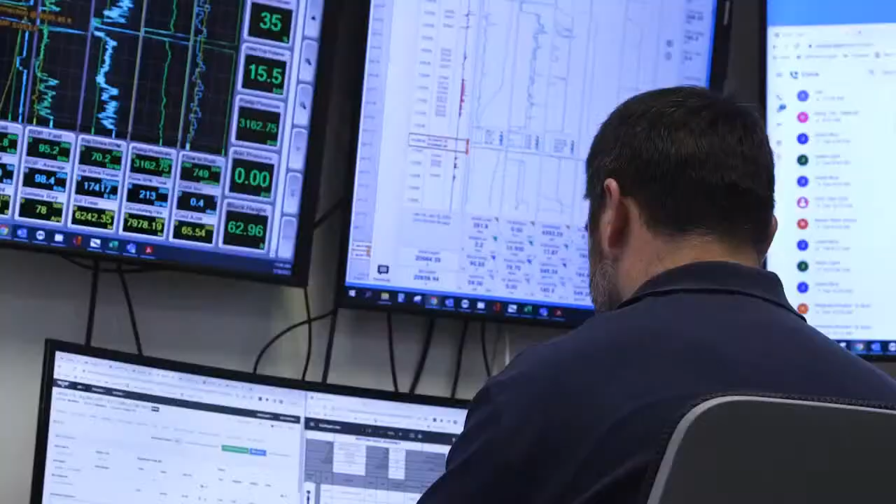Just check and see. All right. Somebody said in the comment section there about bad sound quality. I completely didn't realize that my microphone was pinned to my back. It was on my little cord wrapped around my back. So you guys can't see that. I've got these little fancy things. So thank you, I appreciate that. Right? Like, some people might be like, oh, well, I don't want to be the rude person. No, you're being very helpful. If we do not get feedback in this industry, then we don't get better. So there I am, looking like an amateur. Thank you guys all for pushing in.

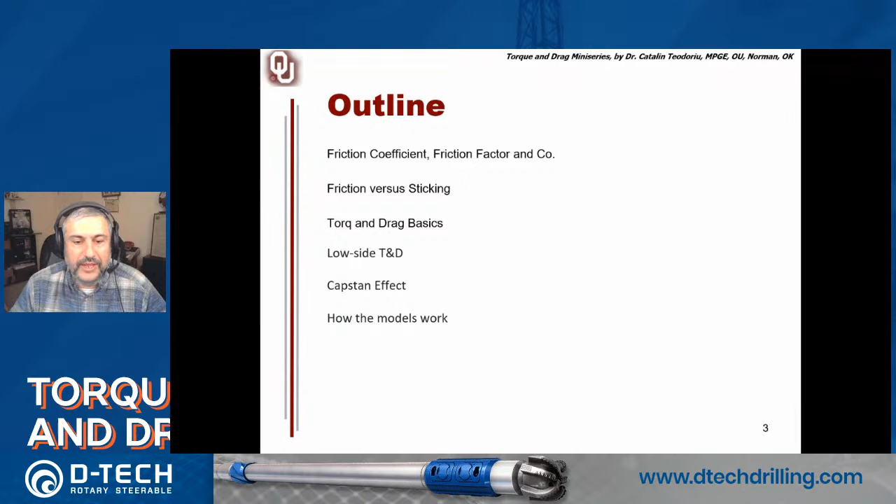So let's look at friction. Friction is typically the frictional force resisting the motion of two surfaces in contact relative to the normal force pressing the two surfaces together. Of course, I took this from one of the famous dictionaries online. But what is very important on friction is that we have friction when we try to move. As long as there is no tendency to move between the two surfaces, friction doesn't exist. That's a very important definition.

Everybody really agrees with it, but I wanted to make sure that it is written on my slides accordingly. So friction is a dynamic process, and normally everything under friction will be defined as a coefficient of friction, which is a coefficient that tries to make a relationship between the frictional forces and the forces that are necessary to move that object.

With this in mind, if we look at friction factor, you will find a lot of papers confusing friction factor with coefficient of friction. And I cannot stop, as academia, trying to explain to you that friction factor in most of engineering is normally defined as the coefficient of friction of an actual value divided by the coefficient of friction of a known value.

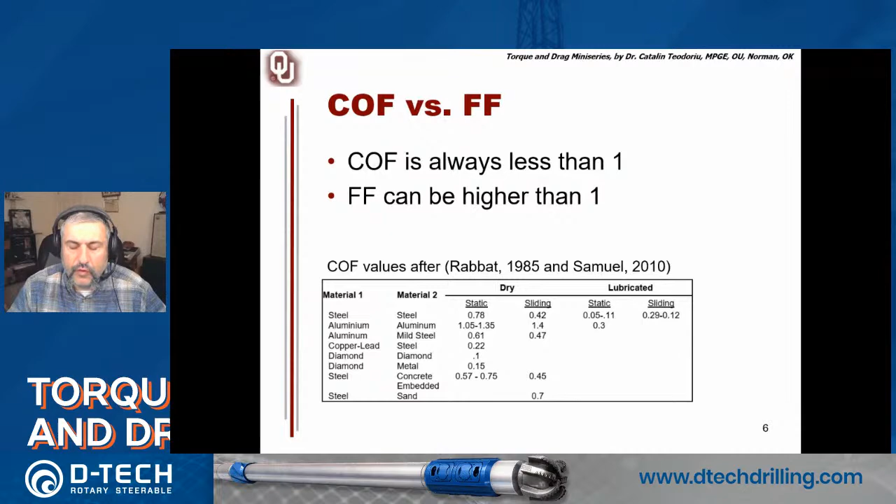But at this point, let's look at the friction laws. We discussed these friction laws in the past two presentations. Obviously, I cannot skip them in my presentation, and I'm pretty sure you're going to see them in the next 10 presentations that will happen here. But the idea here is that we all agree that friction force is directly proportional to the applied load. The applied load normally we define as a normal force, which is the force that acts normal or perpendicular to the surfaces in contact.

The second one says the friction does not depend on the contact area. But here it is very important to talk about what scientifically is the apparent area. Apparent area is not the real area that the two bodies may have. The real area is actually the area that really comes in contact between these two bodies, and I will talk about that too.

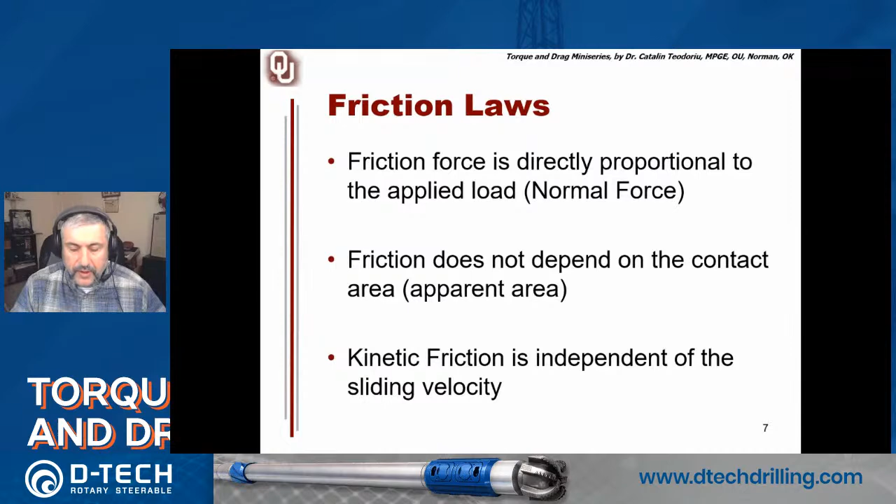And last but not least, the kinetic friction is typically considered to be independent of the sliding velocity. This is something a lot of people are arguing about, and mainly the theory of kinetic friction being independent of sliding velocity comes from dry friction. That means there is nothing in between the two objects. But in reality, we always have something there. So with these three laws in mind, let's go a little bit to the real world.

This has a very important impact on the torque and drag calculations. Why? Because in torque and drag calculation, if you are able to estimate the contact points of your drill string with the wellbore, and you are able to calculate the normal forces at every point, that will show you a big difference compared to a very simplified system. We have talked a little bit about soft and stiff string models, and the main difference will be the ability to identify these normal forces, their magnitude, and because all forces are vectors, also their directions.

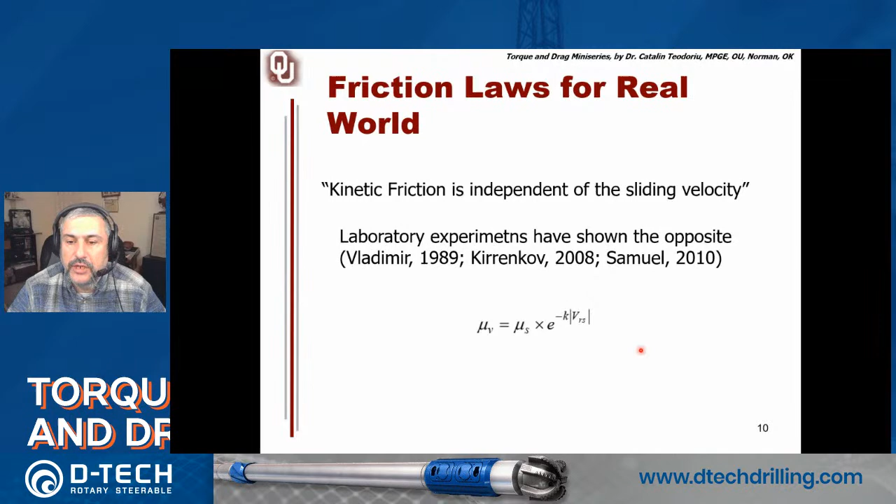And that's very important. I remember there was a very nice paper where adding microspheres of granite or marble into the drilling mud showed a massive reduction of friction in some wells. Pretty interesting work on that. So the world of friction, it's complicated.

So we do have dry friction, and dry friction, in my opinion, does not happen in your well unless you drill with no mud. But even if you drill with no mud, you'll still have some humidity there. You have cuttings, you have a lot of other stuff. So dry friction is more laboratory. So you come to my lab, I will show you how dry friction works. It doesn't work in reality. In reality, we always have wet or lubricated.

The reason I call it wet is that if you have water, a lot of people believe that water is not a lubricant. Believe me, depending on the conditions, water is a great lubricant. And you may ask, where is water the best lubricant? Well, if you have rubber and steel, water will be the best lubricant you will ever have for the system.

Then we talk about static friction, and as I told you already, static friction happens at the beginning of the motion before your object starts to move. And then the dynamic, and you see here in the brackets, kinetic or sliding. Our industry is always fantastic at changing the names. So kinetic sliding friction happens when the two objects are already in relative motion to each other and they are moving.

Last but not least, not necessarily strongly accepted in our industry. However, if you look at the companies building downhole components, particularly downhole motors, bearings, and everything that rotates within each other, we do have hydrodynamic friction. In hydrodynamic friction, between the two surfaces, you always have a fluid. It can be your drilling mud. It can be some other liquid form of lubricant that you are putting in between.

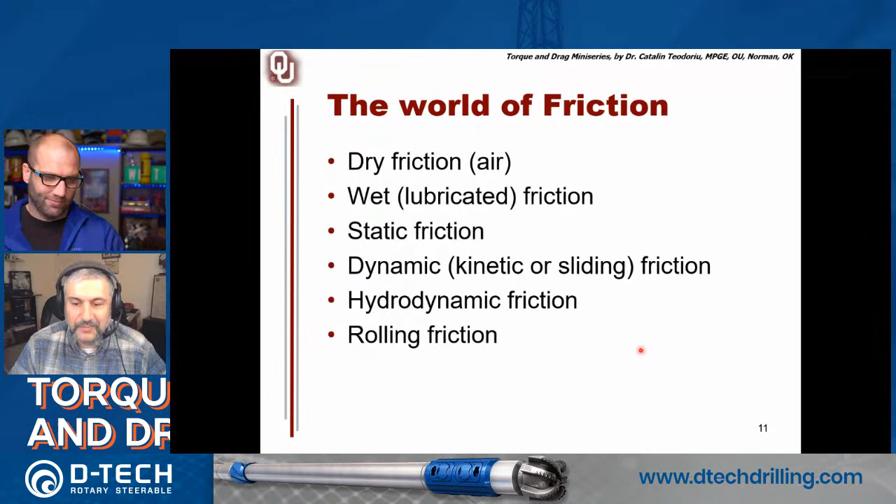So let's look now much more intimately at our friction. First of all, if there is no motion, friction force is 0. There is nothing that you're going to see here. We are in a kind of lockdown, and the lockdown is not the lockdown from 2020, but another lockdown where, if you look at this surface, you're going to find out that every surface we have has a certain roughness. The higher the quality and shine of the surface, the smaller the roughness, but that roughness exists. It's just a matter of how much you magnify it.

Typically, if the weight or the force pushing down is very big, some of these surfaces will highly flatten. They will deform. We suffer local stress deformations that will be induced here. So let's move now to the point where I'm trying to move my system. And in order to be able to move my object, I have first to overcome these points of contact that happen at the micro level between the two surfaces.

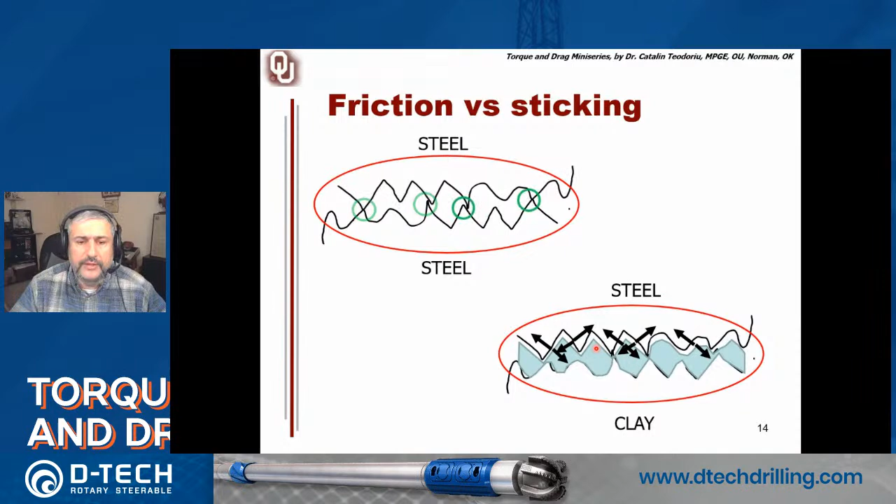In the case of the other materials that we have, sticking can be aggressive. Clays are pretty much one of them, but we also have some medium type of sticking here. The next one I like to call shear. Imagine that you have an object like the one shown in the lower part, the one that is now moving back and forth, and you are trying to overcome this, let's call it a macro tortuosity you have in the well.

Whenever you try to move that one, because the object is much more rigid than you expect, that object will now try to shear to correct the wellbore. And this is not friction anymore. This is actually mechanical work that you spend in the well in order to destroy the rock, to break the rock, and allow the object to move.

Why I'm talking about this is that a lot of the time, we are trying to adjust the friction coefficients in the hole by performing a mini back and forth movement of the string or rotating the string and so on, in order to understand how the friction works in the well. And then whatever you see in the top drive values, you try to put that in your model, and that's the way you do calibration of your friction factors.

But do not forget that in a real well, you don't have only the friction you see on top, the friction that actually allows you to find out what the coefficient of friction is. In the real world, you are also shearing, you are crushing the wellbore, because the wellbore quality is not perfect. And tortuosity and micro-tortuosity in the well and their effects have been discussed a little bit.

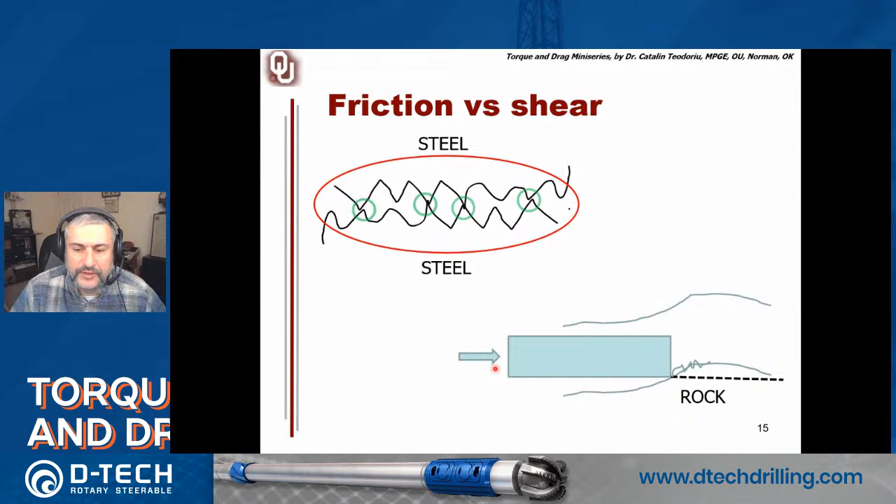These are most of the models that we all agree on, implemented in a lot of software today - they will have their own adjustment of the Coulomb friction model inside. Keep in mind that this typically happens symmetric. A lot of people consider it to be symmetric, meaning that if you move to the right or to the left, the system will just be a vector, but symmetric in shape.

I found out that depending on the surfaces, especially if two surfaces have already been moved in one direction, when you suddenly change the direction, the friction may be slightly different, at least for a while. So that's kind of very important here.

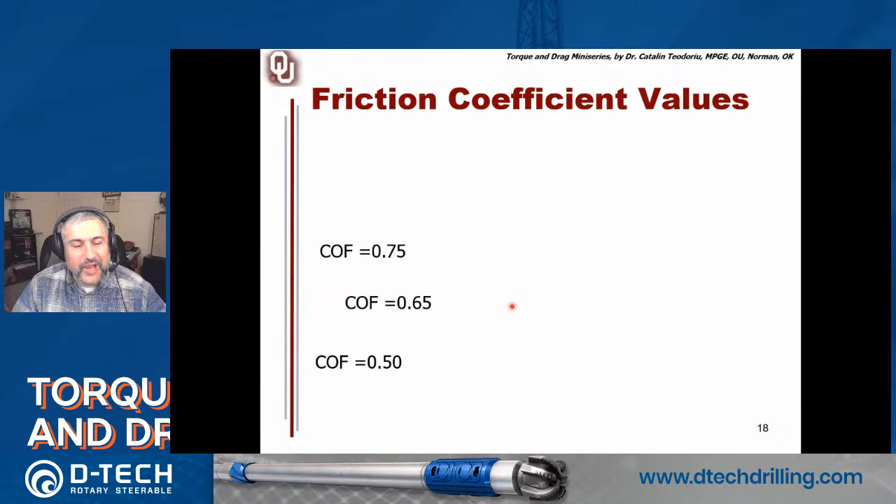Okay, so now we are getting closer to some ranges. These are some values I got from the drilling manual, where they say in an open hole you expect somewhere between 0.15 to 0.3. If you switch to oil-based mud, 0.15 to 0.25. I don't really agree with that - I've been testing oil-based muds in the past, and I found much lower values for oil-based mud in the system. What I can agree is that most laboratory tests have shown much lower values than field tests.

The reason, if we go back several slides in my presentation, you will notice that downhole you do have sticking and shear, which will alter your overall values. But also, these are some other values I have found. This is Gaynor et al. 2001, friction factors, a coefficient of friction, taken from over 100 wells. You can see most of the values are literally below 0.3 on average, so we have really low values there.

This, in my opinion, is where we have to look, because if you test a steel against the rock in a laboratory environment, you will get values which are actually typically lower than 0.25 in most cases. There are very few cases where you get a higher friction coefficient in any laboratory for that.

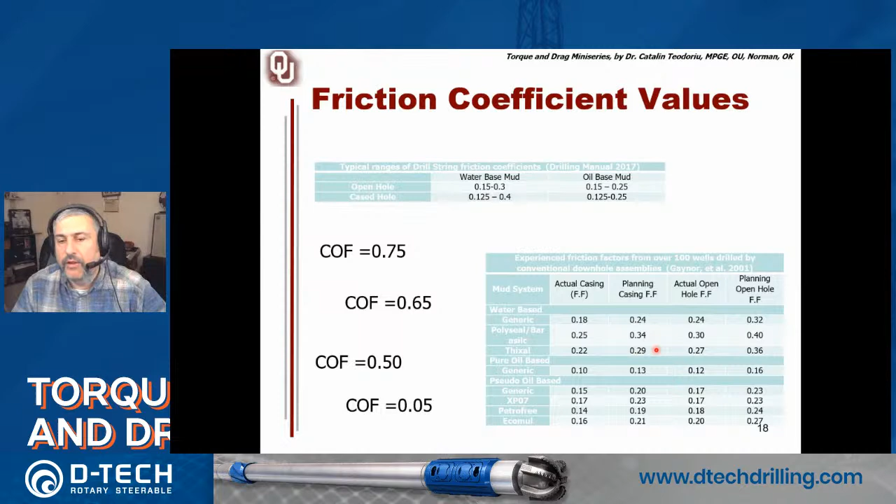This is something very interesting, because if we really want to dissect the friction factor, we want to find out why the friction factor creates so much trouble. So I had to spend 19 slides, actually more than 19, to talk about friction factor in torque and drag. The reason is because friction factor depends on almost everything you have downhole: wellbore stability, fluid properties, deflection technology, formation type, hole cleaning, and of course the properties of the materials in contact. A lot of things will create trouble downhole.

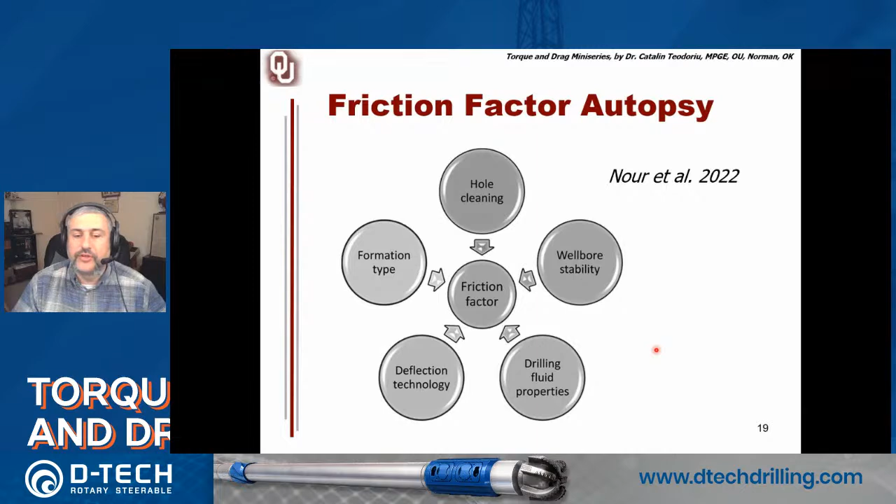But it's important to learn about that and to solve the problem. For example, hole cleaning: we know that the more cuttings you have in the wellbore, the more friction you have, so just do something about the cuttings. We know that drilling fluid properties, like adding additives, will enhance the properties related to friction, so let's do some enhancement on all these properties.

So at this point, let's go to calculating torque and drag. The classical theory of torque and drag, these are the slides I received from Mr. Juvkam-Wold when I started teaching my first class at Texas A&M. He was so kind, he said okay, this is what you have to teach, and you teach it. For your information, I started teaching at Texas A&M somewhere in the middle of the semester, co-teaching the course with Dr. Juvkam-Wold, and he was so happy to dump on me all the torque and drag.

So at that point, if we look here, this is a piece of our drill string. We chop it, put it downhole, and work on that. On this piece of drill string, we have our tension in the drill string pulling down, normal, generated by the weight of the object acting along the wellbore. Then on the other side, we have the tension plus the incremental increase of that tension on the wellbore. Important here, we look at the inclination, one of the main important factors that is inevitably critical to address torque and drag in wellbores.

So the equations are pretty simple. We assume that the acceleration is 0, so that means we can do a very simple force equation on that. So the sum of forces along the wellbore is 0, and the sum of forces perpendicular to the wellbore is 0. That allows us to define the increase of tension, which will be proportional with the weight and cosine of inclination, and the normal force will be the weight sine of the inclination.

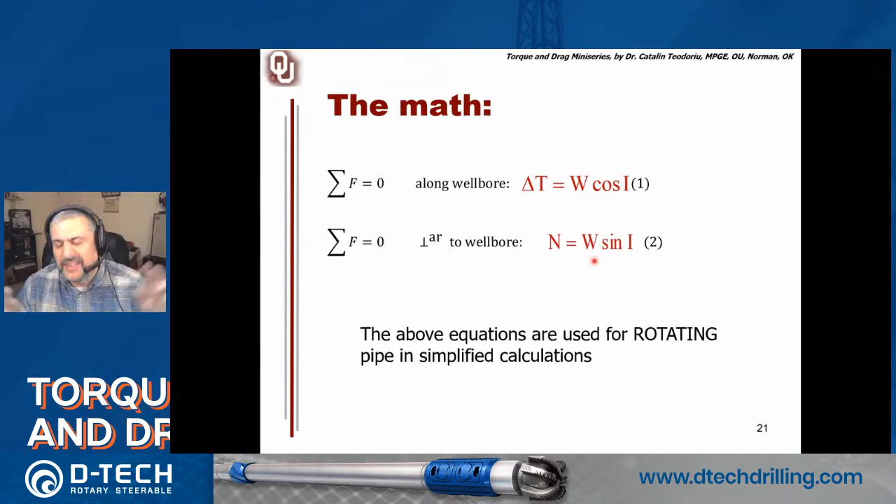Typically, we consider this equation as being valid for when you rotate the pipe, because rotating pipe means that you are in a dynamic low value of friction coefficient. So friction in this case, as an assumption, is no friction at all in the system.

Now, when friction happens, we really need to move the string. So the string has to move, in this case lowering the pipe. The friction force will have to oppose the motion, because friction force is the opposition in our torque and drag system. So friction always opposes the motion. And when we raise the pipe, you're going to notice the friction will go in the opposite direction.

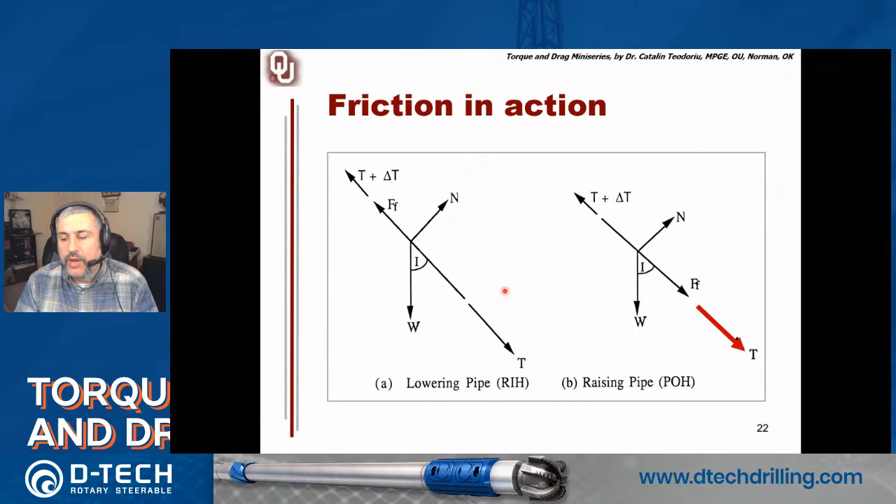So once we learn that friction exists, now we can write the same type of frictional forces for that. You can notice here that the change of tension will become the weight cosine inclination plus or minus friction force. Friction force now has to be treated as a vector. So if the friction opposes the motion, depending on the direction you go, the friction force will be adding to the tension or will decrease the tension.

This is very important, because whenever we do a calibration in the field, the friction coefficient calibration, we do this in both directions - lowering the string and raising the string. We look at both directions, and that gives us a much more accurate way to measure the friction coefficient for our system. As you can notice, typically the friction coefficient in the wellbore has to be between 0.15 and 0.4. I got the same from Juvkam-Wold a long time ago. He's pretty legacy on that, so he knows what he's doing.

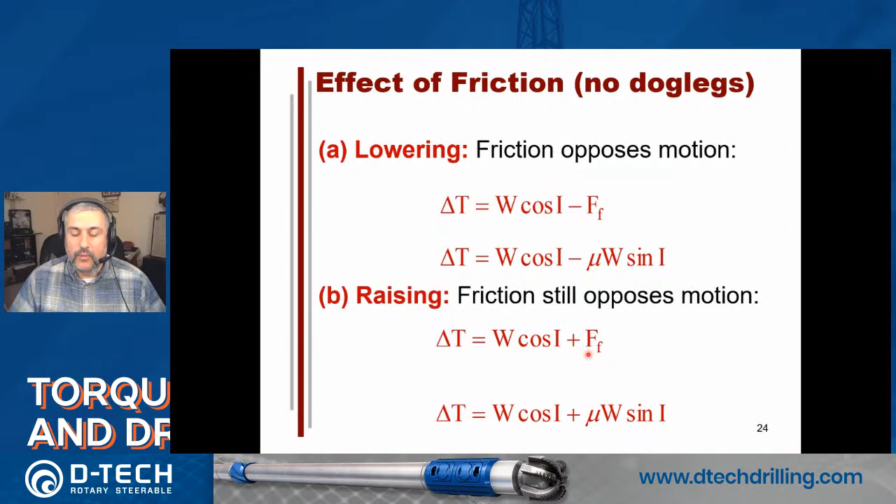So now, again, I try to write the same equation once again. For the lowering, we have to keep it negative. So when we lower the string at the surface, it will look like the hook load will decrease, because the friction force is kind of opposing the weight of the system. When we raise the string, when we trip out, the friction force will be very bad for the whole process, because the friction force will add weight to our system and will increase it.

Here is a very classical example that I believe almost every petroleum engineer in this world has had in his classes. It's about what is the maximum hole angle or inclination angle that can be logged without the aid of drill pipe, coil tubing, or other tubulars - in other words, a free fall of the tool. Assuming that you forgot to set your slips correctly and your drill string free falls in the wellbore, the question is, what is the wellbore inclination where your tool will stop? I know this happens a lot in our industry. So let's look at that one.

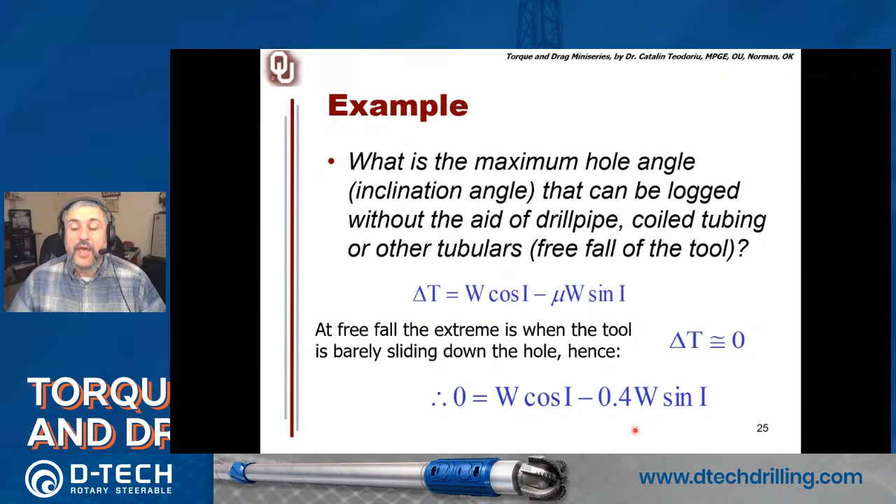So in this case, we assume that the increase of tension in our logging tool, which means the wireline, is 0. For that, we know that the weight or the force that is moving the tool downwards is supposed to be equal to the friction force. You can see here I put a value of 0.4 for the friction coefficient, and from here we can easily calculate the inclination of the wellbore.

In other words, if you are dropping things in the wellbore, the higher the friction coefficient, the better. Obviously that will not be good for drilling and for torque and drag, but at least if you don't keep your wellbore clean and you keep dropping tools in the wellbore, make sure that they will stay better for you. So with this kind of inclination, this will apply to the bottom hole assembly. That means that in a horizontal well, the bottom hole assembly will never push on your bit, and we know that.

So that's why in order to create some weight on bit on a horizontal well, we need to push the whole string downhole. Something that in a classical vertical well theory from the 1950s, you'll be told don't do that because you are buckling the string. So let's go to the next one.

Basics of equations for horizontal wells. Horizontal well, if we assume that we have just a simple pipe, the pipe sits on the wellbore. That's the classical soft string model. We have the weight on the pipe. The normal force is equal to the weight of the pipe. So we can easily write that the force to move the pipe is friction multiplied with the weight. I put here some numbers just for getting some ideas on that.

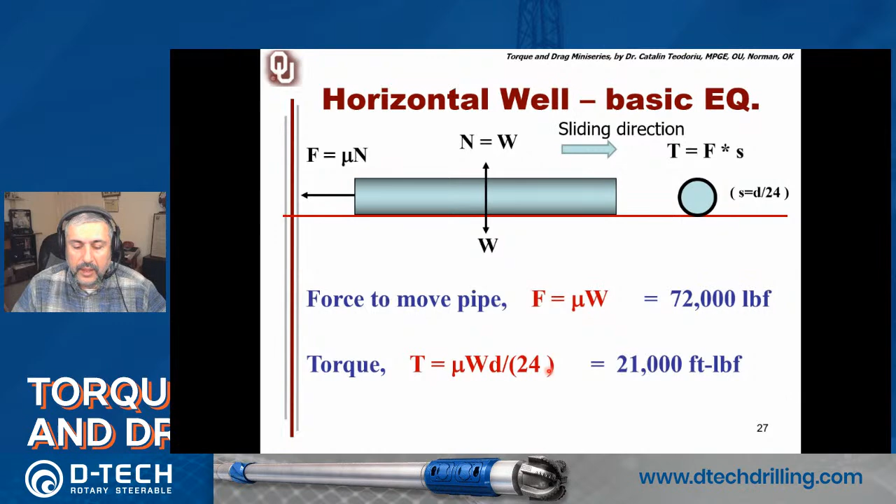And the torque will be now classical mu, so friction coefficient multiplied with the weight, which will be the normal force, multiplied now by the diameter, and I divide it by 24 because typically we are using foot-pounds for the units, and it is a unit conversion. But what is actually important in here, I will show you in the next slide, is that whenever you rotate the pipe, because of the friction we have in the wellbore, the drill pipe or drill collar or whatever rotates in the well will tend to climb on the wall.

So instead of having a contact here at the bottom, we're going to have a climbing on the wall for the system. And because of that, normally and accurately, we need to correct this with the cosinus of phi, which will be shown in here. And this cosinus of phi needs this correction according to the system. Some authors, for example, have also included now the fact that we are in motion. So we have omega divided by the velocity, slip velocity for the system. So you create another equation here.

Samuel in 2010 actually introduced a much more complex equation where actually here we are talking about the dog leg, we are talking about the sinus theta as an average, and that will be like a 3D model for this complexity. So this angle becomes even more complex for our system.

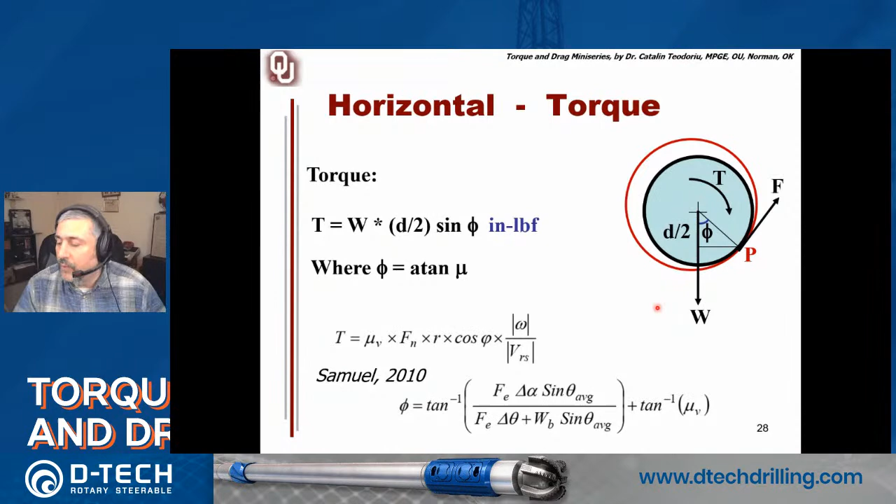So with all of this in mind, it means that if you look at simulation on model A versus model B, model C, and so on, you will find out that the accuracy of these models actually depends very much on the equation they are using and how these equations are actually interpreting, for example, torque. Torque is very important on that because torque will generate a lot of further calculation in the well.

Next but not least, we have to talk about the Capstan effect, or if you want, the effect of tension in the drill pipes in combination with the fact that the wellbore is curved. And in this case, notice here, we have the net side load that will act on that one. So the tension in the pipe will inevitably change the normal force. If you remember, normal force is not only the weight of that object, but is also the sum of any other forces that will act on the object.

So in this case, for the model on the right, the force on the pipe will increase the normal force by creating now a normal force which will be equal to 2 times the tension in the object. As you can see here, I'm totally neglecting the weight of the pipe for this case. So new models will start now to add to the torque and drag these side load effects. So you need to have a model which is capable to identify the contact points, and you need models that are able to calculate the forces in these contact points in order to generate this.

So in other words, now that I know that the tension in the system has an implication to the magnitude of my normal force, I have to include this. And the standard theory, the very basic theory, will be discussing the effect of dog legs to this theory. And these are the very simple equations, the basic equations, where in this case, as you can notice here, we have to use the tension, the T, plus delta T as an increase or a change of the normal force on that one.

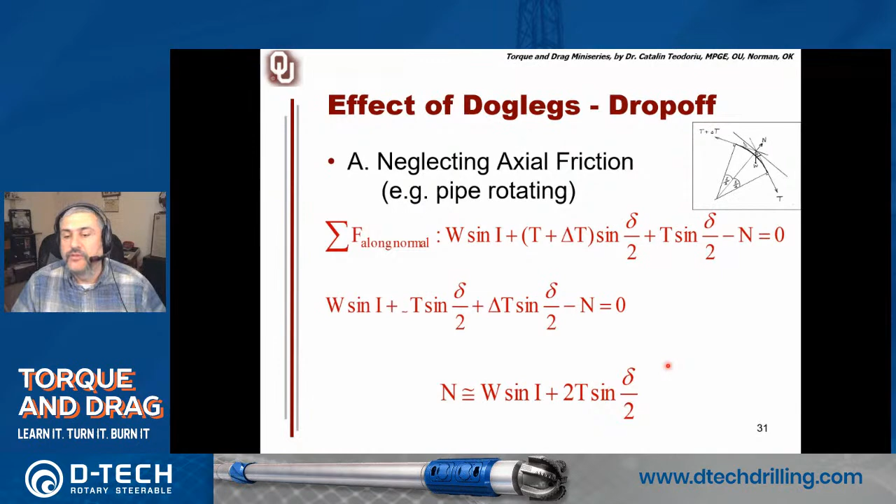The complexity of the model is even higher, but obviously I cannot disclose to you all the secrets of the simulators on the market because I may not survive too long at this point.

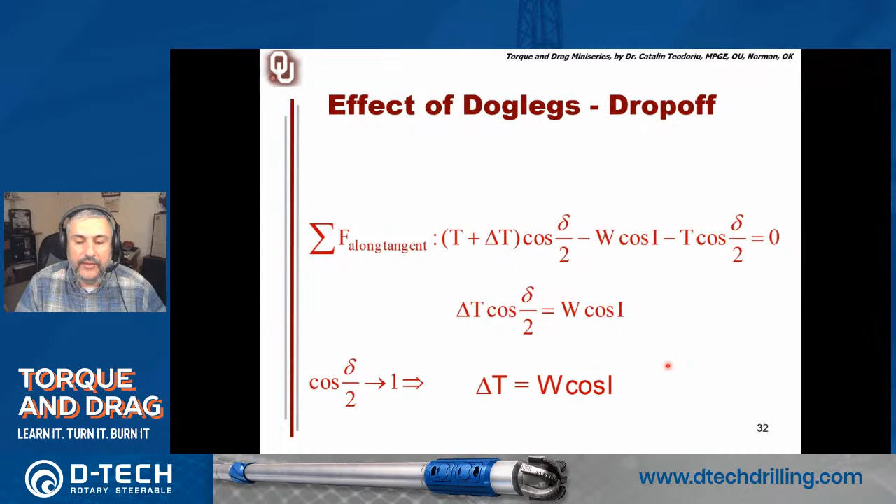So with all these calculations now, the key factor for creating an accurate model is to divide your entire drill string in shorter pieces, and to calculate for these shorter pieces your contact points, so that in the end you are coming up with a normal force, which is a combination of the weight of the system plus the tension in the system.

So now once we add the friction, you will notice here that the friction in the system will alter the incremental increase of the tension in the system. So when you start from the bottom to the top, you're going to add this incremental friction to the tension, and as a result, you will have a much more accurate model for your torque and drag. Do not forget, we have the sign here, minus, and there will be another one with plus, depending on whether you are raising the pipe or lowering the pipe.

Actually, some authors right now are even including a vectorial tendency for torque calculation, where they are considering the fact that your pipe is moving, so that's vector 1, and the pipe is rotating, so you have a second vector, and by combining these two vectors, you are working on this combination of the systems. So that will be the 2D model, and as I said, the 3D model takes into account the whole real part of the well.

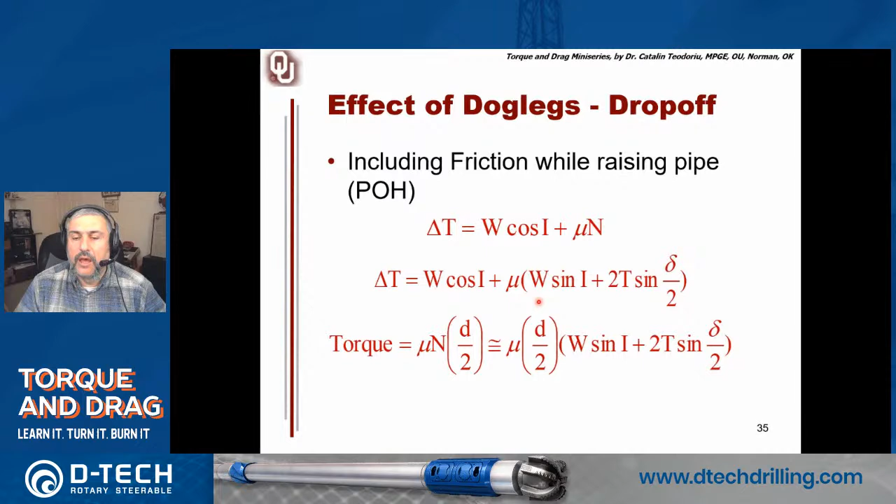In order to have that, you need first of all an accurate wellbore path description. You need real-time measurements sometimes, and accurate measurements. Actually, I found a paper recently saying that particularly in horizontal wells, most of the wells are really off from the predicted path. And there is a big debate right now on the market about the accuracy of drilling horizontal wells, particularly the survey accuracy.

Some other analytical equations look like that. As I said, we could talk for the next 3 weeks if you want me to go through every single system, but this is another model, a little bit more complex, and there are tons of them out there.

But the idea here is that whenever you do this type of calculation, you are using different numbers in order to get adjustments that look like what you see in reality, and these adjustments require you to play with a lot of factors. So academically speaking, what we do in our research group is create a pool of these friction coefficients, and then let the system crunch a lot of these models with more statistical approaches, trying to find a better link between these friction coefficients.

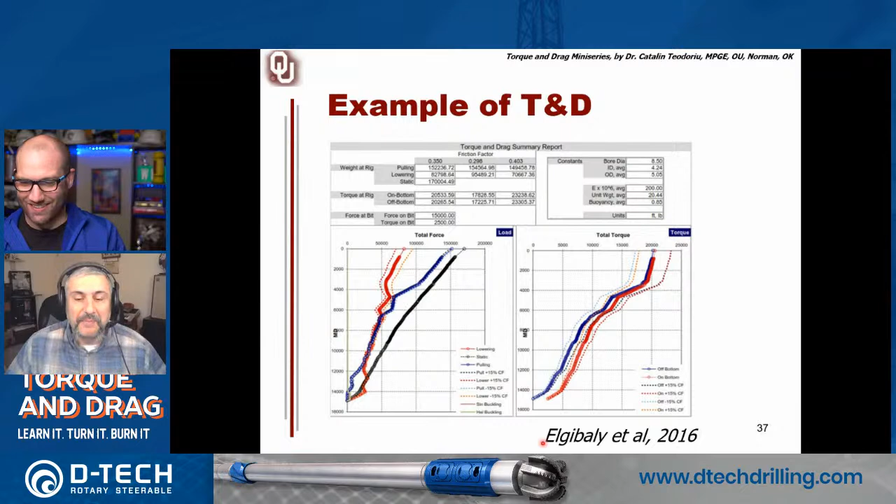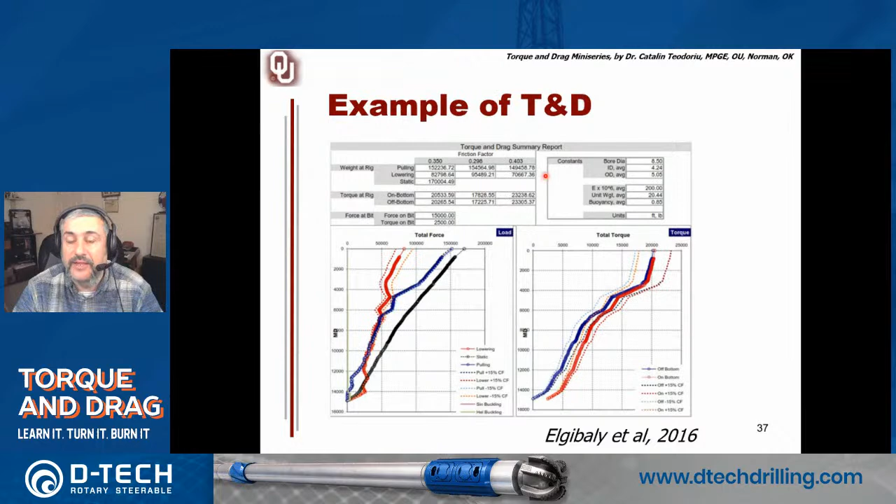So I was saying that typically the wellbore should be divided in sections where you can easily define friction in that section, and you should actually have a variable coefficient of friction along the wellbore. That's actually the most accurate approach you can have. How you get these coefficients of friction and how you apply them, I believe you're going to see from several of the next speakers, who will come with different models.

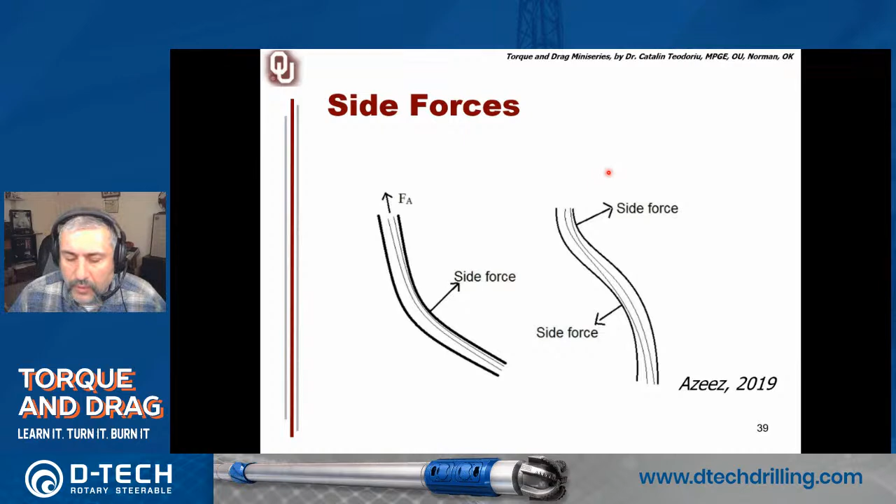The second one, I don't have a picture here, and I didn't know whether I should talk too much in my presentation about that, but the second one is buckling. Buckling will create side forces independent of where the well is. If it's horizontal or vertical, in both locations, you're going to have side forces because of the buckling.

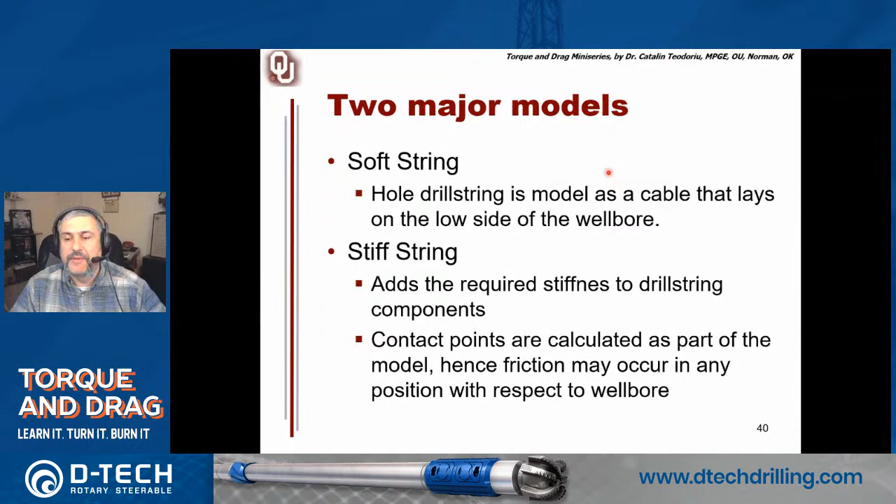So the two major models that you'll find as part of the softwares on the market are the soft string, where typically the whole drill string is modeled as a cable. So therefore, the cable will always lay on the wellbore. And then we have the stiff string. The stiff string typically is the one where you add stiffness to the drill string. Particularly, you have different stiffness for the bottom hole assembly versus your drill pipes, and you create now contact points which are not uniform as the soft string. Now you can play with that.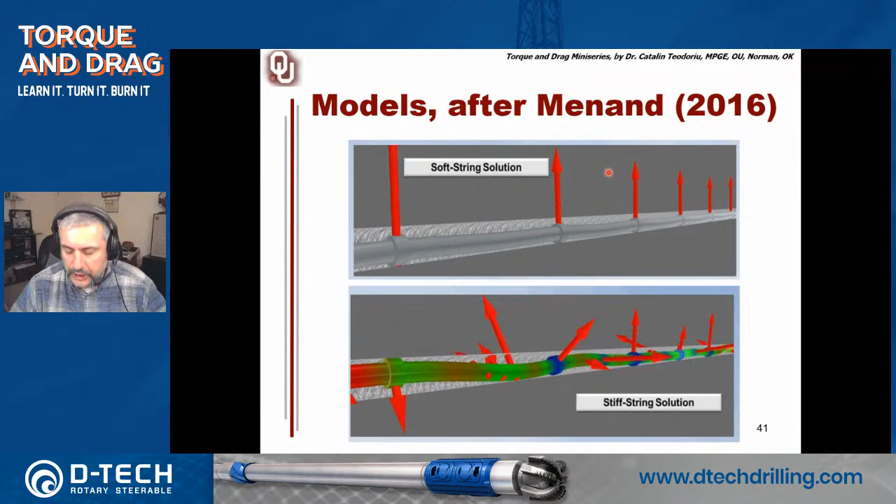Once again, it is because, number one, you are trying to use one value for the entire system, which in my opinion is wrong. And I think that probably the next generation of torque and drag simulations will try to come with a much more complex coefficient of friction distribution in the wellbore. I would call it local coefficients of friction. They could really improve that.

And then, second, don't forget, we have sticking, we have shear in the wellbore, elements that are not necessarily described by the standard equation of torque, where you say the torque is a function of friction coefficient multiplied with the normal force and a sort of arm-like diameter of the pipe and so on. So that's one of the things that I've seen. Friction adjustments are one of the most important parts of our life, and particularly when you work in the field, you need to pay more attention to this.

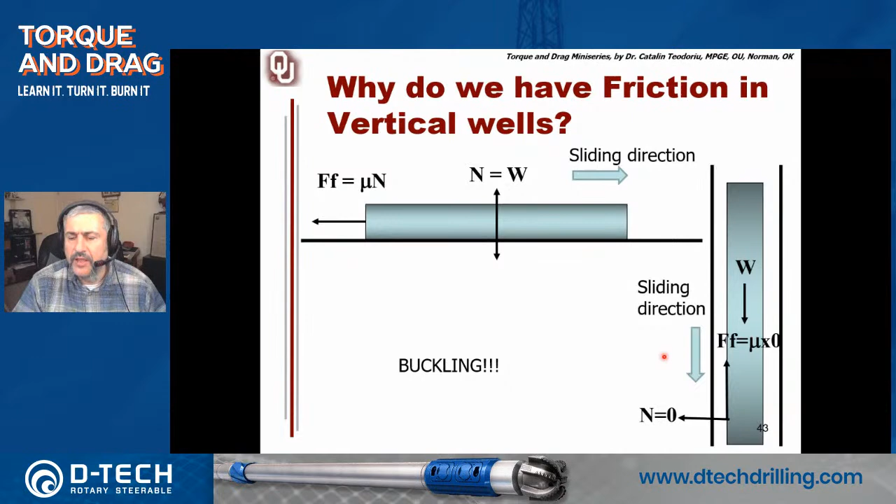well bore. And you can see here from Stéphane's DrillScan simulation, again, the buckling of the string and all these side forces, contact forces in the vertical well, which add this friction in a vertical well. So very important, friction may exist all the time, even if you may not necessarily see at the beginning where the normal force is coming from, because normal force is not only generated by the weight of the string, but also by the other side forces that may take place in the system.

And let's go to the next one. Let's burn it a little bit. What happens when we have friction? I mean, that's the motto of David here. Burn it, let's burn it a little bit. When you have friction, we have heat. And the classical equation to describe heat is that you have the friction force multiplied by velocity, and that will give you the heat in the system. That friction creates heat, and that heat can be so high that sometimes your tool joints will really change color. Have you seen that? I bet yes.

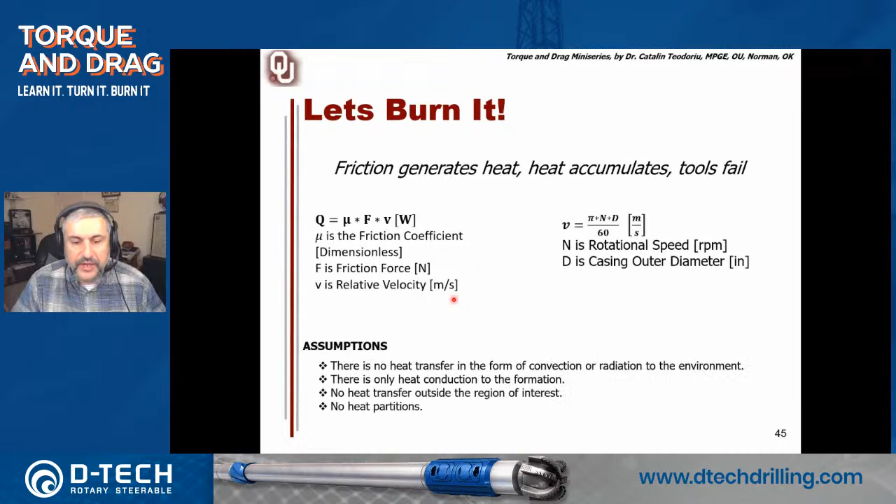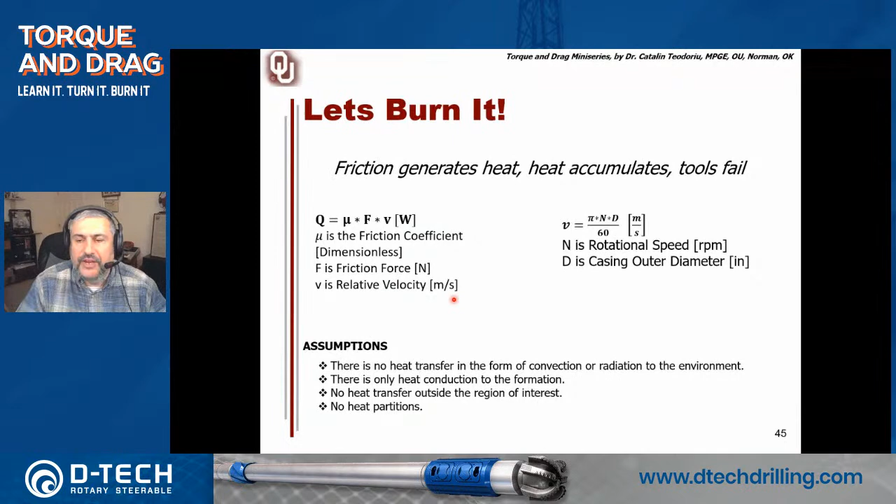So you can see that torque and drag is not only important for allowing you to run and move your string in and out of the well, but actually if you are neglecting the friction in the well bore, you may end up heating up your entire elements. And because friction happens locally, friction will affect only one small portion of your string. You are not heating up the whole string. That would be perfect because the heat would be uniformly distributed.

But unfortunately, the heat from friction happens locally on the contact point. And that means that you can overheat just one coupling. You can overheat just one tool joint. And that may lead to a total destruction of that element. So be careful. Do not overestimate or underestimate the friction in the system. Friction, however, matters more in torque and drag analysis because you have to understand vibrations too.

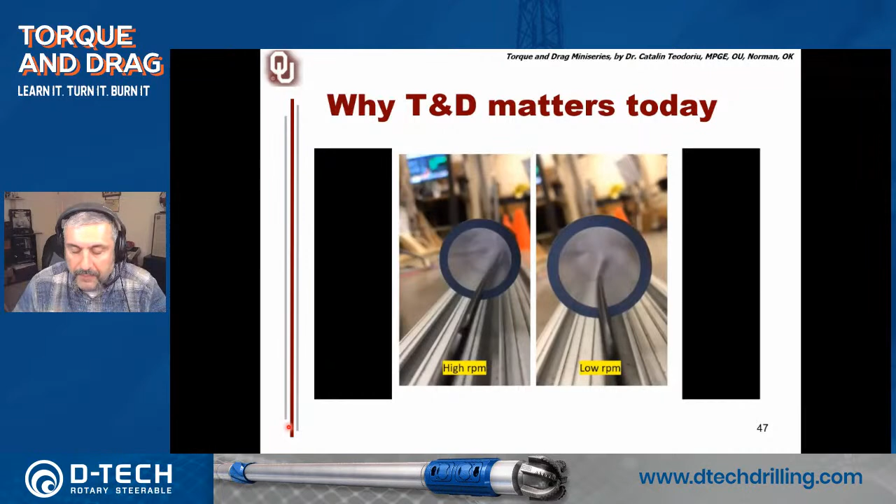So now you can see that friction may cause a lot of dynamics in the system. Azar and Samuel 2007 have presented, for example, that erratic torque values may be visible, which are caused by torsional dynamics. And this has nothing to do with the friction per se in the wellbore, but is actually backwards. The friction creates high torque. The high torque creates stick slip. Stick slip will start imposing torsional dynamics.

So torque and drag understanding is highly important in order to identify vibrations and mitigate vibrations. Typically, the more friction we have, the more vibration arresting; the vibration will be attenuated by the friction in the wellbore. However, if the magnitude of this friction is not understood, you may end up creating more torsional dynamics in the system. That's why there is a very strong relationship between torque and drag and vibrations.

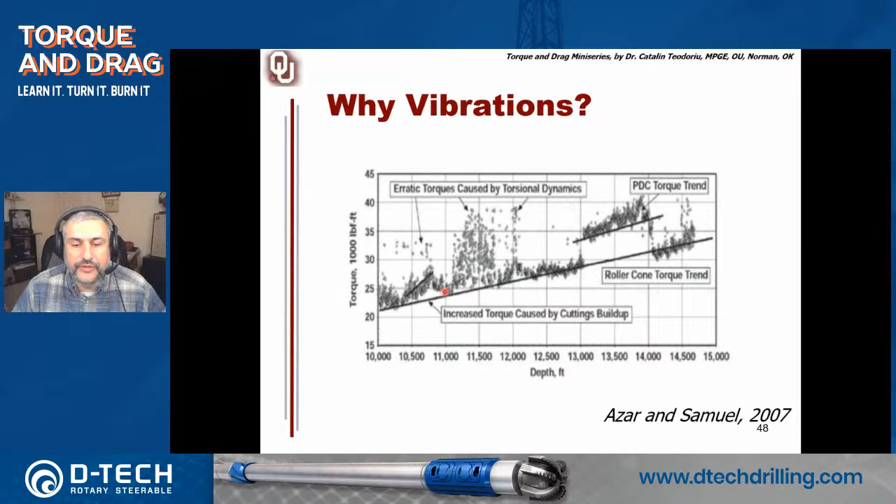How do we reduce torque and drag after we learn everything about friction coefficient? Yes, reduce friction coefficient. Or try to change the contact parts. So instead of having a contact between your drill pipe and the wellbore, make the contact between the drill pipe and a rotating protector. So you are moving between surfaces which are known, like rubber to steel, with a much lower friction coefficient.

Also, drill smooth. Control tortuosity, control micro tortuosity. I think our sponsor will tell you that using a rotary steerable system with special design components and software, you will be able to minimize or eliminate a lot of tortuosity components which are creating high friction in the wellbore. And that's something that we work on here.

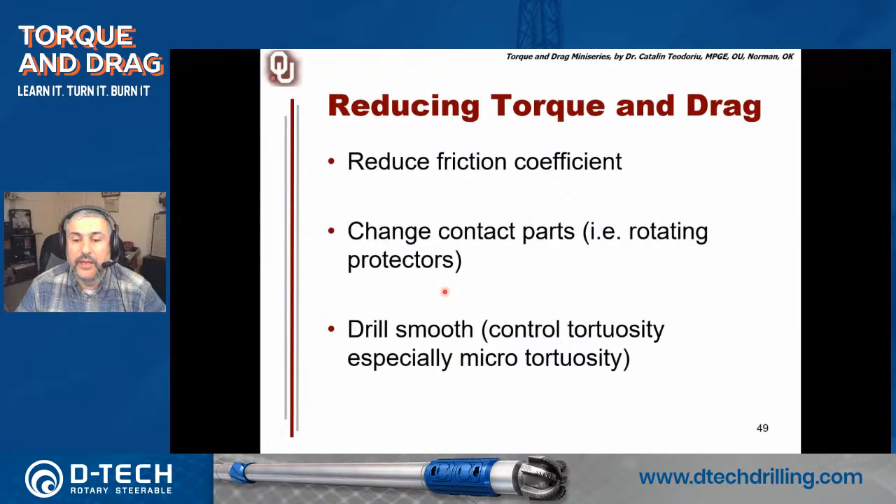Also, try to make your string a little bit lighter. We need stiff or rigid elements, but lighter. Ideally that will be casing drilling: a string that is very rigid but very light, and that could help a lot with the friction. Casing drilling has also been described as reducing friction in wells. There are a lot of key factors behind that.

Why do we use the RSS and consider it for that? I'm pointing here to two things: continuous rotation and controlling microtortuosity. Why do you think RSS will be the one that will reduce friction in a well compared to any other tools? Any ideas? Maybe our sponsor will give you some prizes if you come up with some fantastic ideas. Why do you think RSS is the best to reduce friction in a wellbore?

Yes, dog legs. So we talk about macro tortuosity, the big aspect of tortuosity. Dog legs are very important. Excellent, high RPM. This is something very interesting on RSS. There is a nice tendency right now to move RSS to higher RPMs. High RPM is not so good for the drill string in the curve section, but high RPM on RSS actually helps you a lot in reducing friction. So that's fantastic.

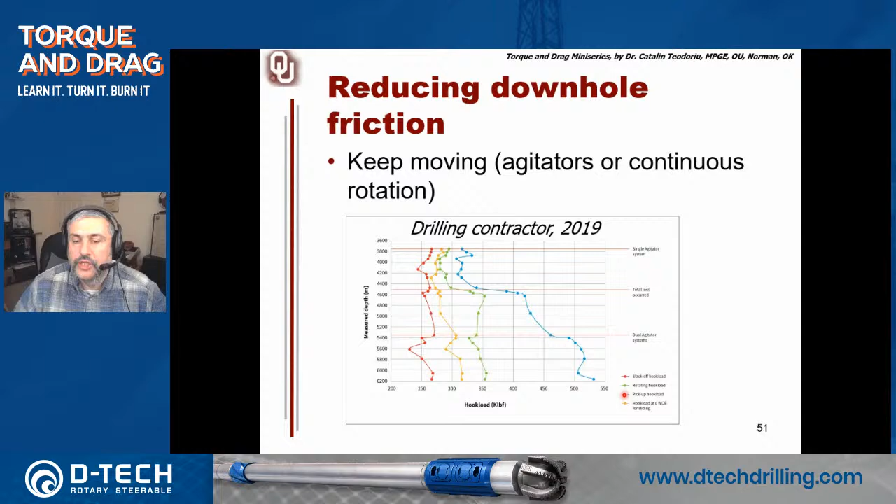You can also see clearly that if you look at the measured depth, having better systems will help you enhance or reduce your hook load, and also help you reach or achieve deeper sections or longer horizontal sections on the well.

I think we're almost at the end, but I remember somebody was talking about completions. In torque and drag for completion, the equations will be the same, it's just that you have different elements. You have a casing, a tubing, or a wireline that goes into the system, and you have to reconsider the equations applied for that. But especially when working with large pipes like casing, a stiff model is really needed. You cannot use a soft model for casing.

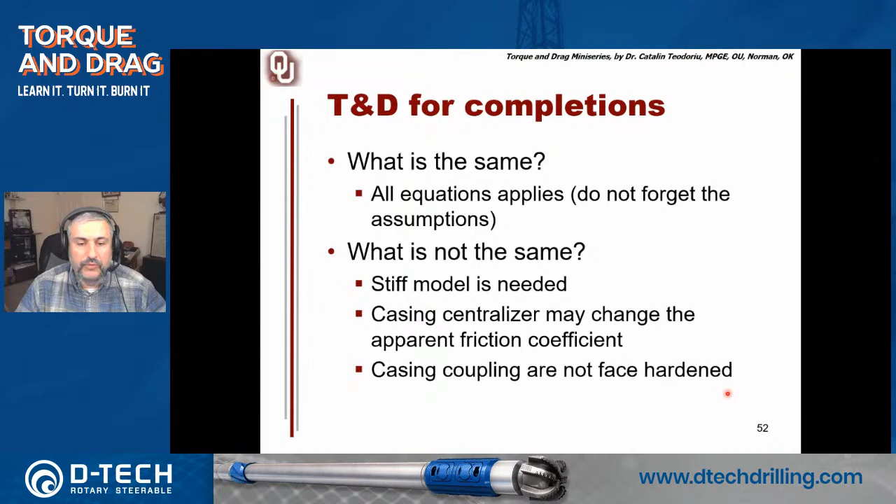Casing centralizers may change the apparent friction coefficient, so be careful, you don't have the same friction as you'd expect. There are a lot of components happening there, so you need to do a lot of equations on that. And casing couplings are not face hardened, so don't forget that a lot of face hardening friction coefficients may not apply for casing. Of course, we can talk a lot about completion, but I believe there will be more discussions in the future. I just wanted to show that I have an idea about these two.

Complication. I love this sentence, it's taken from Zhu et al. They published a paper in 2014 and said that based on nonlinear coupling vibration of drill string, a three-dimensional nonlinear dynamic model and dynamic friction torque model were established in highly deviated wells with slide drilling using the finite element method to study the vibration rule of dynamic drag and friction torque of drill string in rotary drilling. This sentence says everything about how complex or complicated you want to make it.

But it's not always about complication, it's about making a model to work. This is something I'm pretty sure you're going to see next week. The detailed models, which sometimes allow you to create digital twins, have to work. They have to be reliable, to provide you the same results over and over again, and to provide you numbers or data that are really usable for us in the real world, in the field.

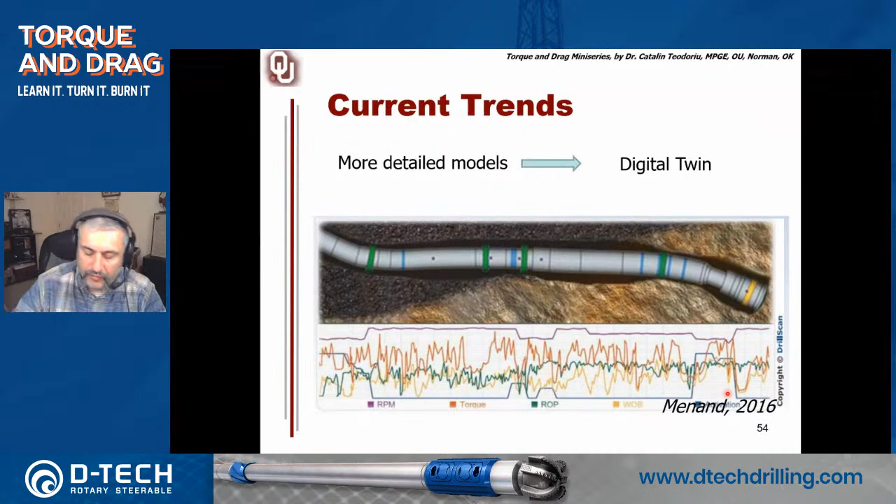This is all about that. It's 9:30. If David wants me to talk another three hours, I will do it. But I believe there were a lot of questions in the chat, and I will be more than happy to take over the questions. David, you can take the lead for that. Alright, well, thank you so much for the presentation, tons to learn and great interaction from the audience. Thank you guys all so much for participating and essentially answering the questions from the professor, little pop quizzes every now and then.

Alright, so let me jump in here. This is one of the first questions we had come up: is 0.08 the same for even premium dopes? I think we were talking about friction factors, or rather coefficient of friction. So yes, the 0.08 is the value API has recommended in one of its older standards as being the ideal value for the coefficient of friction inside of a tool joint when using an API-defined thread compound, or a dope, as we like to call it. This value is adjusted now for every thread compound you buy with a so-called friction factor, where you divide the coefficient of friction of that compound by the 0.08. It has nothing to do with the friction coefficient inside of a wellbore, where we have different values, but that 0.08 is indeed the coefficient of friction recommended by API for any thread compound used in the oil business.

Rawad says, for slide 13, in a theoretically perfectly smooth surface, what happens? No static friction difference or something else? So we can throw that up. I'm just trying to go to my slide 13. It's been a long time since I was talking about slide 13.

Now, there is no perfectly smooth surface. In reality, in pure theory, whenever the two surfaces come in contact on a perfect area, the second law of friction states that friction is independent of the contact area, so it will be the same. That's why in reality, the second law of friction actually depends highly on the contact stress between the two surfaces, because with contact stress this roughness will go deeper into the other surface, and apparently you're going to see a different friction coefficient. But for a perfect situation, there will actually be a pure constant friction coefficient. Just wanted to throw that out there.

Jose says, nice presentation, thank you so much. All right, back over to the questions. We already did that one, so we need to uncheck that one.

Dr. C asks, slide 11, which one defines rotational friction while drilling: rotating with motor, or drilling with RSS? The rotational friction while drilling will actually be what we call dynamic or kinetic friction, because your system rotates - you are rotating inside the system, and as such you are in a pure dynamic mode. Rolling friction refers to when, between your drill string and the other surface, you have another roller that creates a rolling situation. But normally, when you do rotating with motor or drilling with RSS, you are in a dynamic mode. So the friction there is dynamic, and that's why we like to use an RSS - because with an RSS, your system is permanently in dynamic mode. Whenever you start tripping in or tripping out, your system is dynamic, so there will be no high friction first and then low friction - there will just be one dynamic friction coefficient all the time.

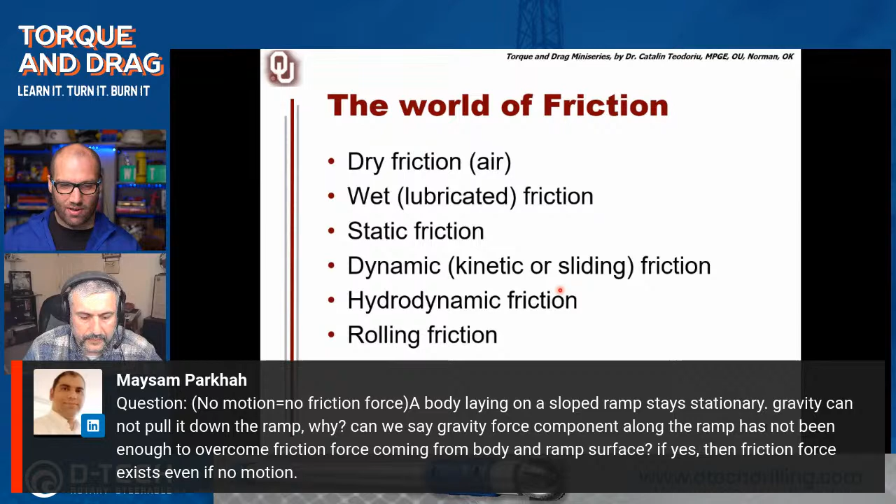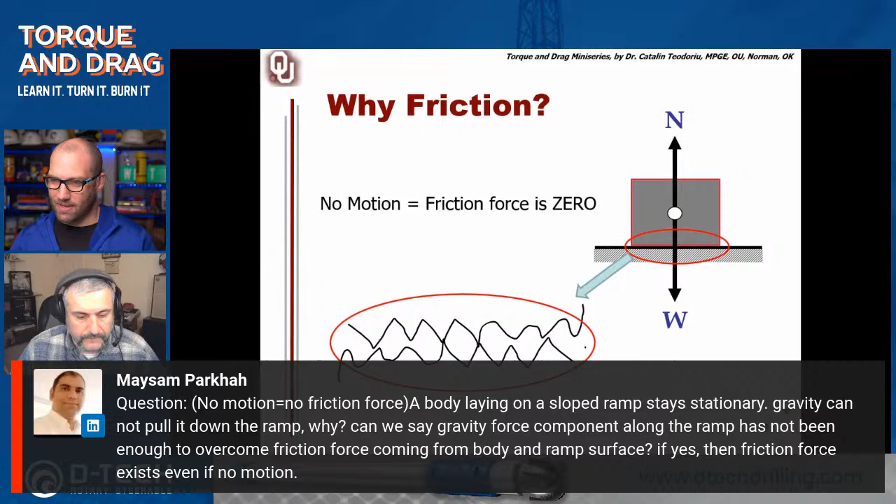Well, that's the funny part of friction - in order to have a friction force, you need to have a system in motion. If the system doesn't move, we do have that interaction between the elements, but that is an interlocking - it holds the components in location - and that interlocking, we can say, is not a visible friction force acting on your system. However, what you're saying is that the system would like to move, but because it wants to move, I have the friction force. Keep in mind that my slide here is on a perfectly horizontal surface, that's why I don't have friction. The moment the surface is inclined, my system has a tendency to move, and because the friction force is bigger than the force trying to move the object, the friction force exists. So my assumption of no motion, zero force, is on a perfectly flat surface when there is no force acting horizontally on the object. I hope I answered the question - if it makes sense to me, then it should make sense to them. So, come on, David, all right.

Rawad asks a question on slide 17: though the factor becomes constant with speed. The rotation speed may affect other aspects such as cutting size, temperature, mud flow around.

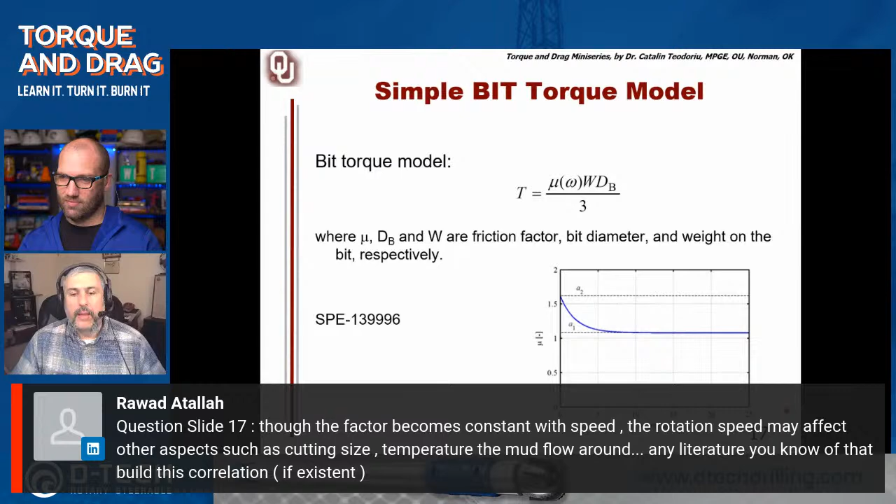Any literature you know of that builds this correlation, if existent? Well, there are several papers that actually talk about much more accurate torque at bit equations and correlations, where this equation is slightly improved. I use this because it's the most accepted one, and a lot of models in computer software are still using this one. I think Detournay, I'm not sure if I'm saying the name right, is one of the guys typically talking about this.

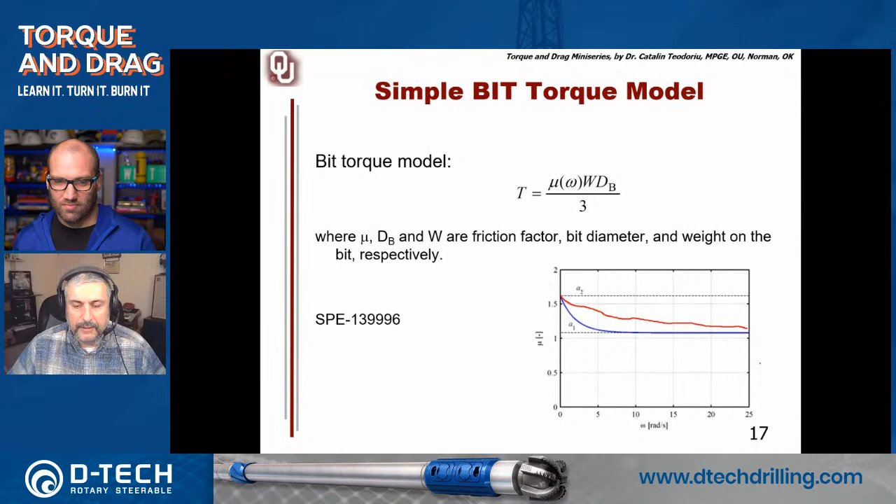We are currently building a new setup where specifically we're going to look at this, and we try to see how flat this section will be. Keep in mind that because of the constants A1 and A2, you can play with them, so this curve can actually look much different. For example, one model we are currently using looks a little bit like this, so it's a slightly different curve. But as I said, I will really start with this paper, and if you look inside, there will be a few more citations of several authors dealing with that.

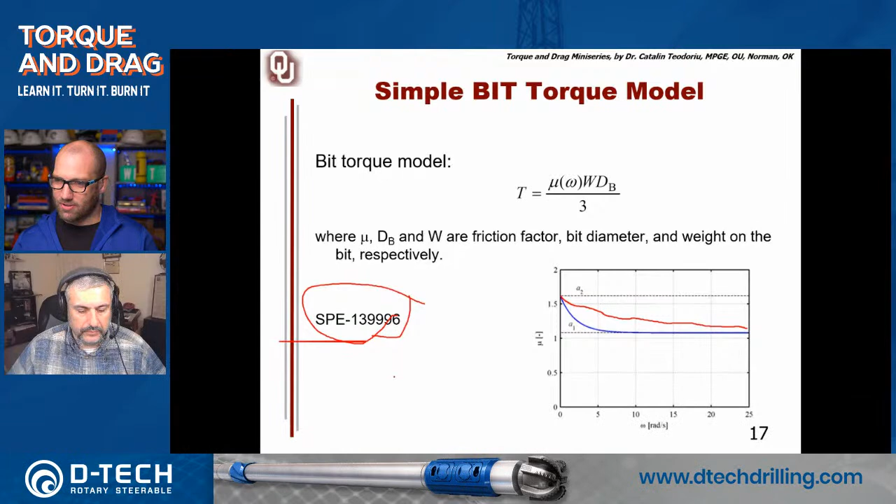That's okay, slide 18. If in reality there are factors in aggregate that tend to increase apparent coefficient of friction, why are the actual coefficient of friction values higher than the planned? I believe I'm missing something here.

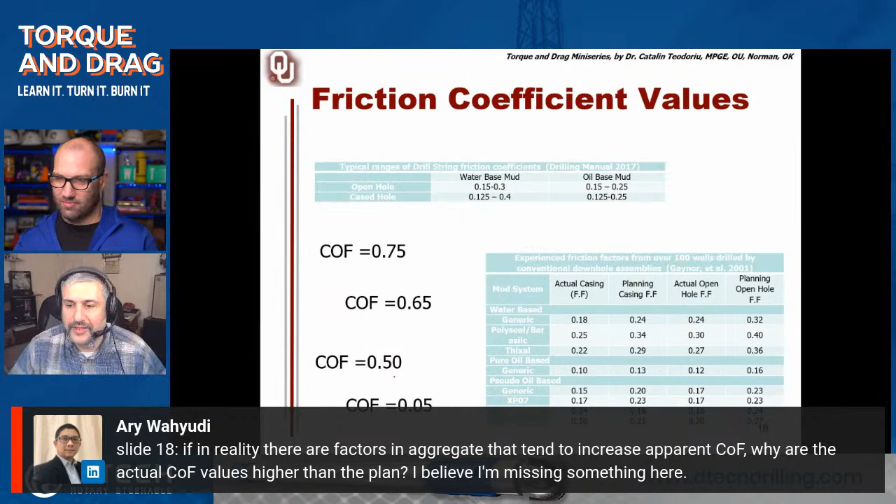Well, we need to ask Mr. Gaynor and all the other co-authors of that paper. I literally took the table from there and tried to show how they've done it. So actual are normally the values that they measure. Planned is whatever they start initially with. My two cents as an academic, I believe the planned values are based on laboratory measurements, and as I told you, laboratory measurements tend to be a little bit higher than real ones. That could be something there. It's a nice paper - if you search for Gaynor et al. 2001, you'll find it, and it's a nice paper to read.

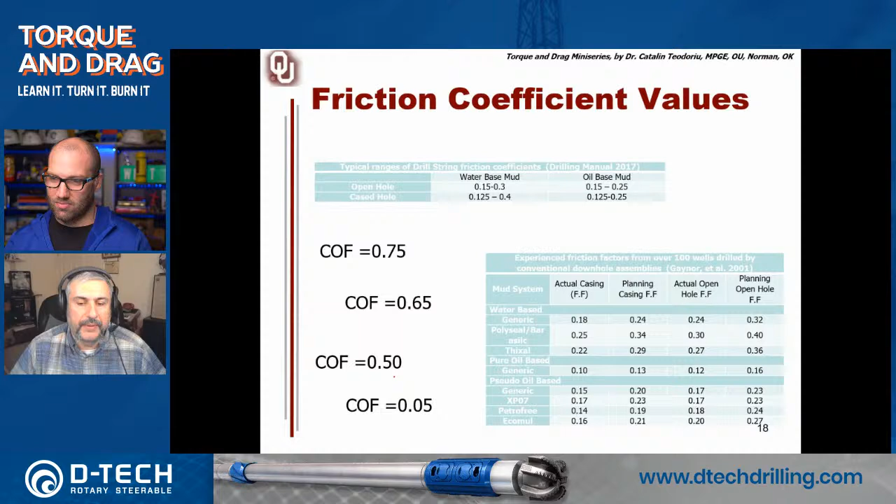Rawad asks on slide 39: isn't side force technically the normal force we discussed, depending on the tension and the dogleg severity? Also buckling, of course, when occurring.

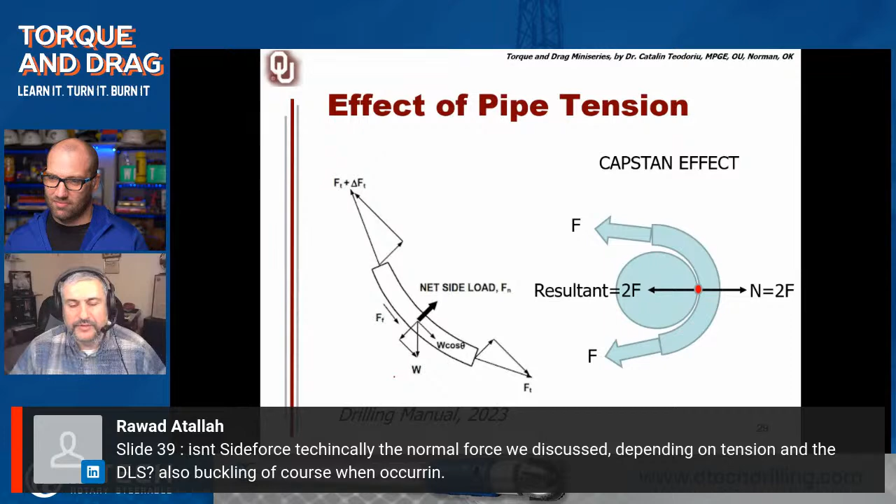Well, in a 2D system simplification, yes, it could be the normal force. But in the most complex models right now, side forces are vectorial definitions of vectorial entities, so they may act in a completely different direction. Also, the side force now includes not only the weight of the system, but all possible other forces that act on the system, like tension in the drill string. One thing that comes quickly to mind is when you have differential pipe sticking, the side load will also be affected by the pressure in the well bore and will change this.

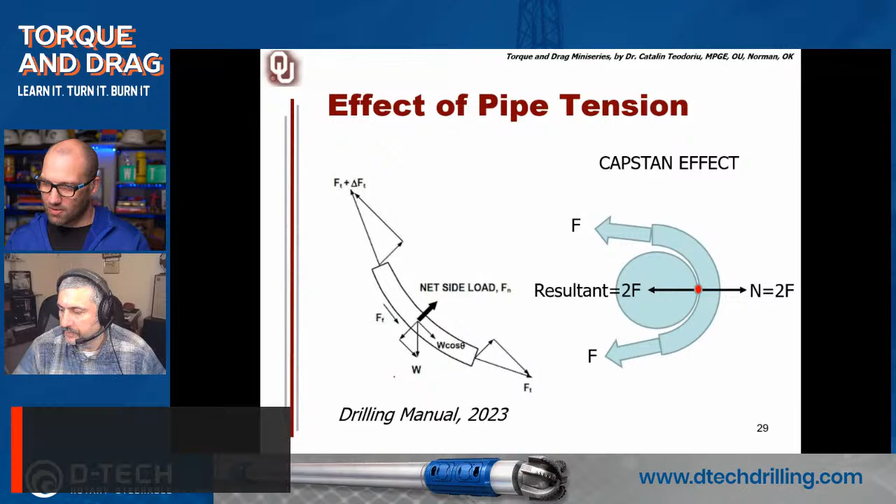All right, okay, just got to keep track of where I'm at here. So LinkedIn user, whoever it may be, thank you for the question. Slide 42: on bottom and off bottom torque as a function of weight on bit, breakover torque, impact of viscous coupling - plenty of torque types to talk about.

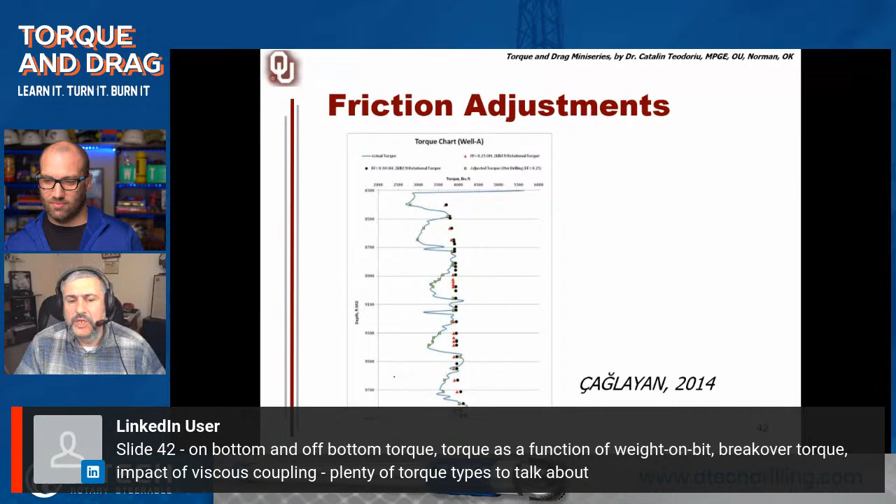Thoughts? Oh yes, I agree. Right now in the most complex models, I've seen a lot of new models incorporating the interaction between drill string and drilling fluid, the viscous coupling of the system and so on. I would say that in a lot of experiments I've done, if you try to really use proper downscaling, viscous components on the torque are typically negligible, within the 5% which is typically the accuracy you'll be able to determine your coefficient of friction. That's kind of my answer. Of course, the complexity of downhole torque and drag is much more than we are able to capture as of 2023 in our models.

But with better computers, better models, more scientists, more researchers, we're gonna be able one day to have the perfect twin of whatever happens there.

So I need more students. Look at that. More students, more research, more models. There we go. All right, let's pull that one off.

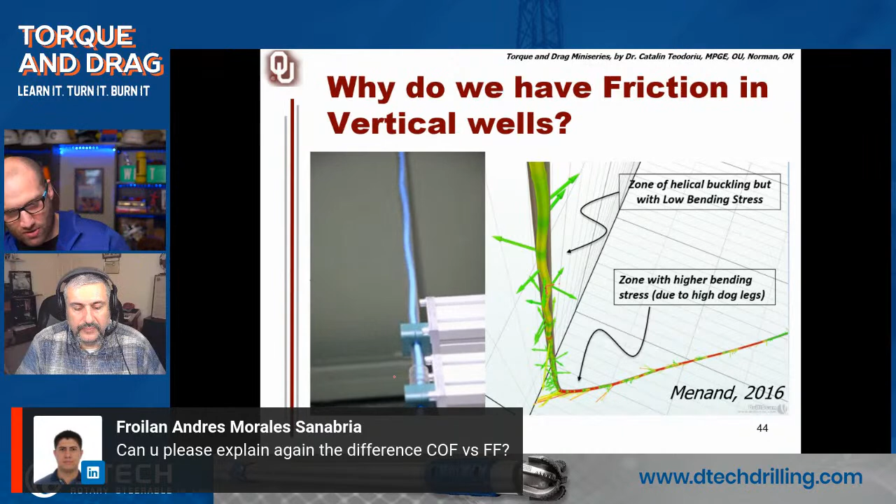Andres, thanks. Can you explain again the difference between coefficient of friction and friction factor? So the coefficient of friction is the value we use to define the friction forces inside our well. It's a value that can be determined mathematically or experimentally. The friction factor, by default, in any engineering situation, is defined as the coefficient of friction of the actual situation divided by a reference or known coefficient of friction.

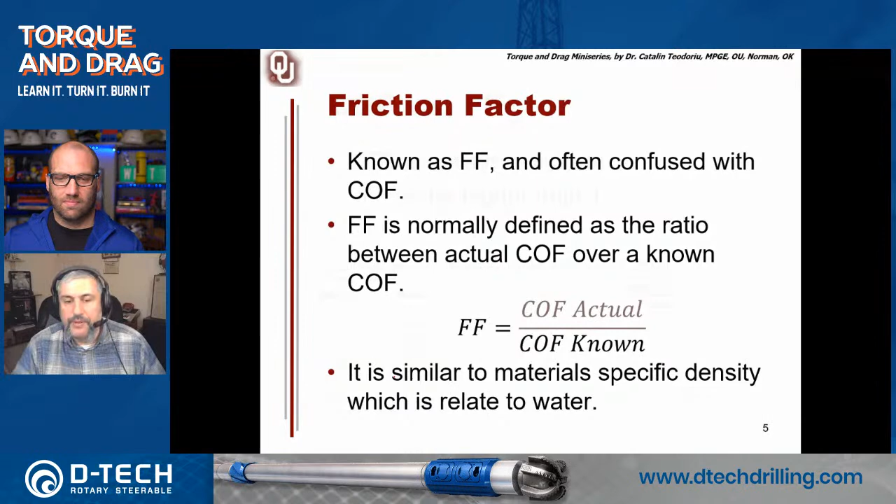And it's pretty similar to what we do with specific density, right? An object with a specific density equal to 1 has the same density as water, 8.33 or 1,000 kilograms per cubic meter, depending on the unit, but 1 is very easy to memorize. So the coefficient of friction can be any value between 0 and 1, and typically should not be bigger than 1, according to the theory of friction. Whereas the friction factor can be any value, less than 1 or higher than 1; it typically moves around 1.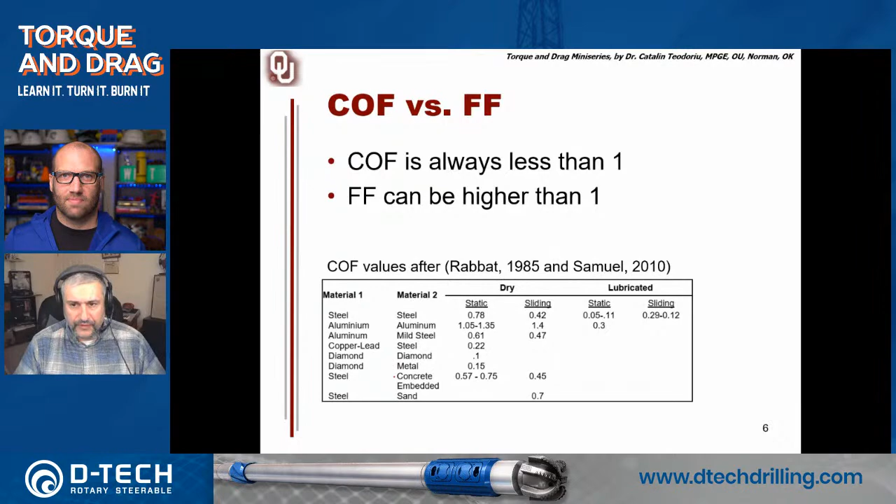So the friction factor cannot be used for the friction force calculation. The real coefficient in the friction force calculation is this mu here; this is the coefficient of friction, and that's the way it has been defined.

All right. Oop, already put that one up.

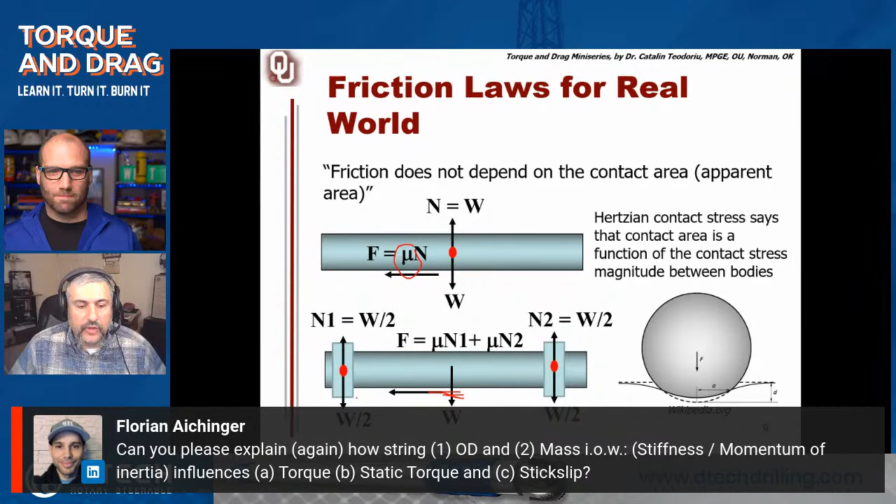So now, Florian, can you please explain again how string OD and mass, stiffness, moment of inertia, influence A, torque, B, static torque, and C, stick slip? Okay, let's have a look at this slide. If I have a system which is very stiff, the system will never bend. In the figure below, there will be no contact here; the only contact will happen on the couplings. So for a very stiff system, my contact points will happen at the couplings or connections, and I can do all the calculation.

If the element, however, is very heavy, inevitably it will start hanging, so we get the hanging belly like a tiny pig, and the hanging belly will generate a contact in the middle. So instead of only two clearly defined points, I will have another point in the middle. When this element starts rotating, because of the 3D motion, I may still have fixed contact points, but this hanging belly will start touching the whole wellbore, and this will completely change the calculation of torque and drag in the well, and will require, like the DrillScan is doing, using these contact forces, and that's why you have to move to the stiff model.

So this is just a disclaimer, guys, for everyone else having amazing software on torque and drag. I do apologize, I do not mention them too much. It's because I have not had them in my lab. I have not used them for my students or for myself to train myself with that. So if you want to support my students and my classes, feel free to talk to me where I can get some demo of that software. I would love to use them. The moment I know how they work or a little bit what I get out, I will be more than happy to explain more also in my slides and so on.

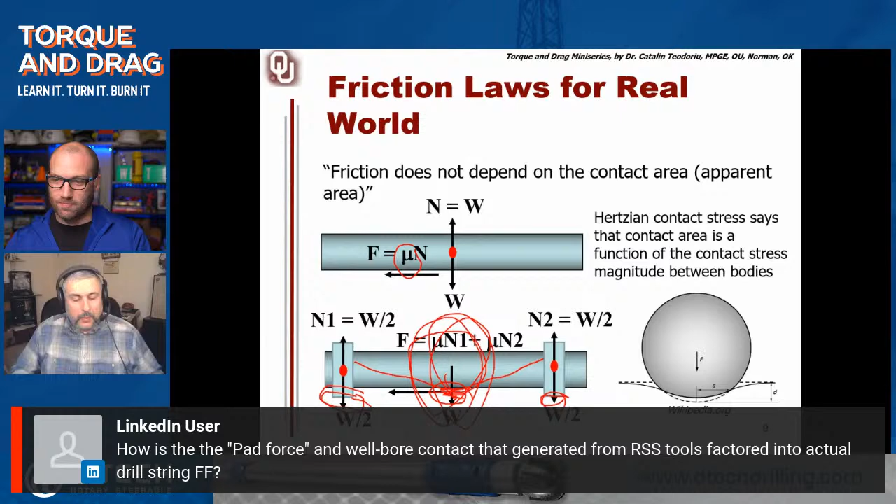Next one from LinkedIn user. How is the pad force and wellbore contact generated from RSS factored into actual drill string friction factor? Well, I think the sponsor of our class today is an RSS company, right? So they should know better than that. But obviously, the beauty of RSS is that the friction will be kind of accumulated in one single point, which will be the pads. When the pad is 1 foot, we consider for drilling purposes like 1 point. So you can have that friction taken into account.

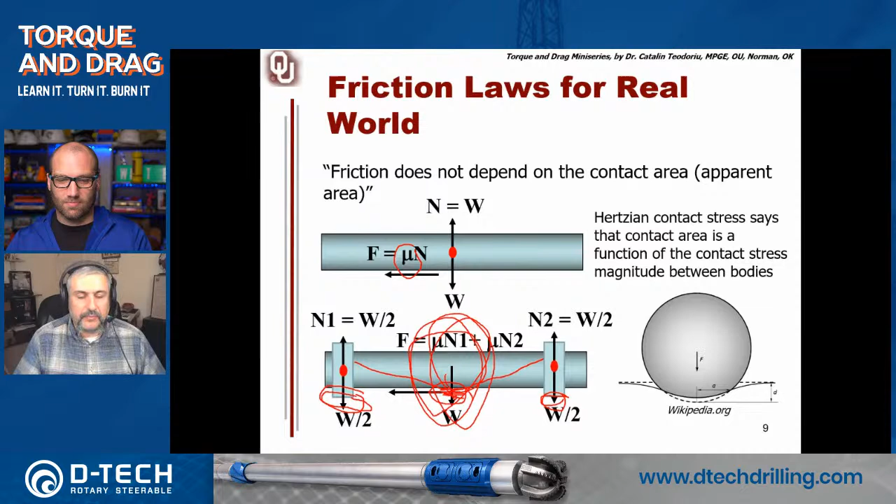But now keep in mind that it depends also whether your RSS is a full rotary system, meaning the whole pads and sleeves rotate while drilling, or we have a quasi-stationary sleeve, it's never stationary, and everything else will rotate inside of that sleeve. If everything rotates in that sleeve, then we have a much more complex theory than when the sleeve rotates, where we just have to add another torque at the sleeve to the torque at the bit. That will be, in a simplified form, the way the torque will be added. When we have a stationary sleeve, well, probably we need 3 hours just to come up with some models, and the models will be much more complex.

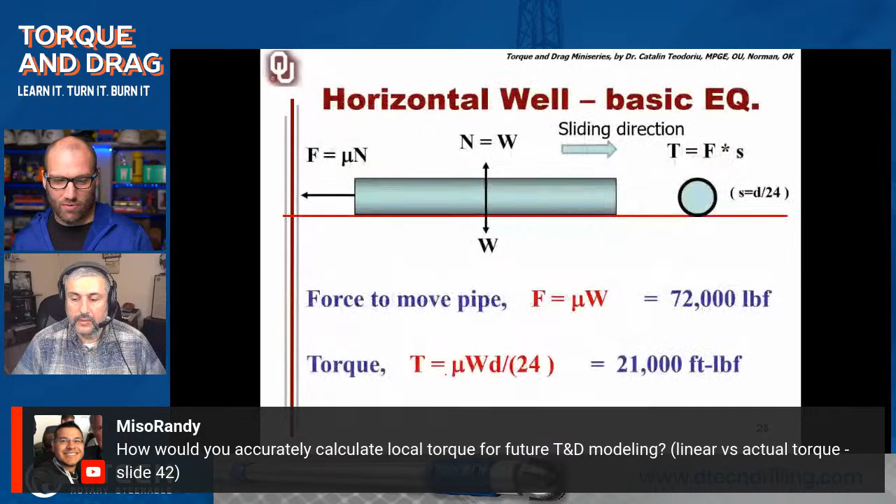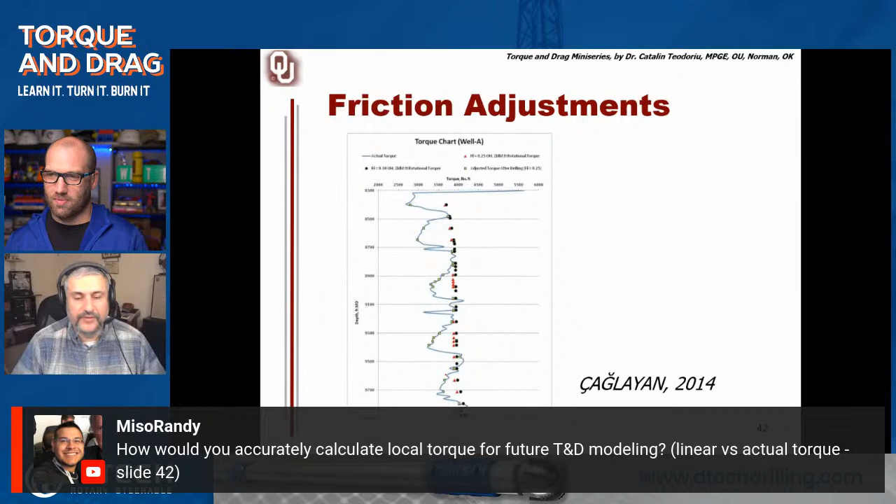All right. Next one, we'll have to bring this one back up. Randy says, how would you accurately calculate local torque for future torque and drag modeling, linear versus actual torque? Slide 42. Well, first of all, there are a number of papers right now on the market which are trying to incorporate very fancy data analytic solutions in order to get a better match. But if you ask me how I would build a new software to do that, the first thing I would do, I would forget about one value of friction along the wellbore. I would talk about distributed sections of friction coefficients along the wellbore and start playing with that. I would also incorporate the effect of sticking and shear into the outcome of my torque and drag for the system, and I think that will be the best.

But not to forget, we have something else. Typically, what we measure as an actual torque is the torque measured at the top drive. The frequency of measuring that torque is 1 second. So that value is highly, highly averaged and highly chopped. So actually, we don't really see the reality of the torque downhole.

I know that some companies, I will not name all of them so the other ones don't stop talking to me, but there are a lot of companies trying now to incorporate in the drill string a lot of new sensors for torque and drag that will enable some of this work along the string. We are doing some research in our laboratory currently. We are trying to identify how many of these tools will really be required in a drill string in order to have a beautiful, accurate torque prediction in a well by using multiple sensors downhole.

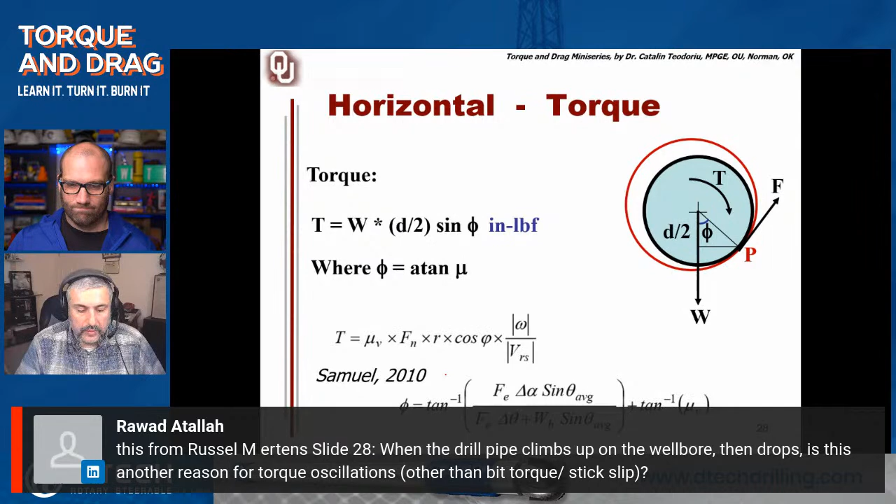So yes, I agree. Torque oscillation happens because there is a point where the climbing is not anymore supported by friction, so the drill string will go down. I do not know what you mean by Russel. I took the two equations which are here from somewhere. Oh, Russel's the guy who originally asked the question. I think okay. So I thought that I have the wrong citation here for that.

But yes, I agree. Friction generates vibrations, and a lot of stick slip situations that happen downhole are not necessarily generated by the bit itself. They are generated by the high friction in the wellbore, and a new generation of simulators is highly looking into this, into incorporating friction into the vibrations. I'm proud to work on one of my research projects on that, thanks to our sponsor.

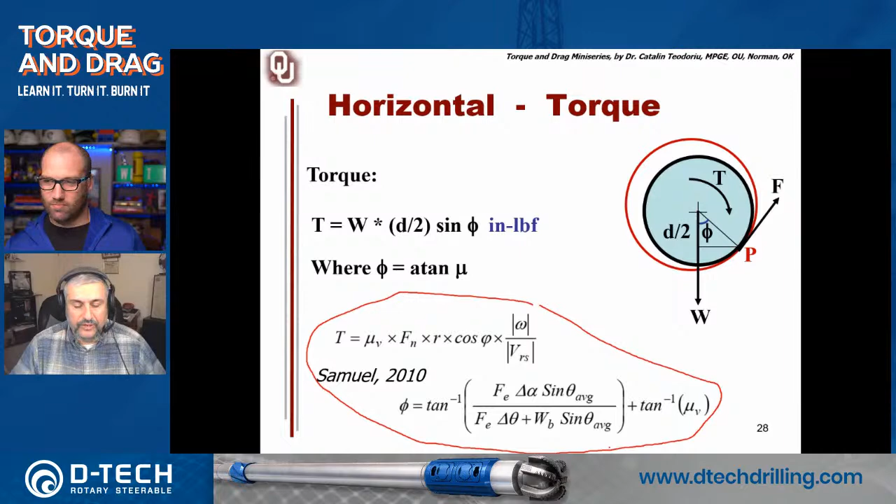All right. Next one here from Jonathan. How do non-rotating centralizers/protectors compare with rolling centralizers/protectors? Well, I don't want to kill the entire industry of rolling centralizers, although I do love rolling centralizers. I believe it is a magnificent piece of art. But to make it clear, rolling friction is always lower than contact friction or journal bearing.

The non-rotating protectors, because the pipe rotates inside, are a journal bearing. The friction there typically is higher than the rolling. So if you really want to achieve the lowest possible value of your coefficient of friction and correspondingly friction forces in the wellbore, rolling centralizers or rolling protectors are really the key. And now that's the moment where I will get a lot of samples from all the rolling centralizer companies so I can show that to my students.

All right. What is your opinion on AI physics coupling models? Are those more accurate? Andres, thank you for your question. Well, David, are you ready for that? Because the moment I give this answer, we'll both lose about 90% of our followers on LinkedIn. Go for it. Okay. So first of all, in oil and gas, and particularly drilling, I believe that artificial intelligence doesn't work.

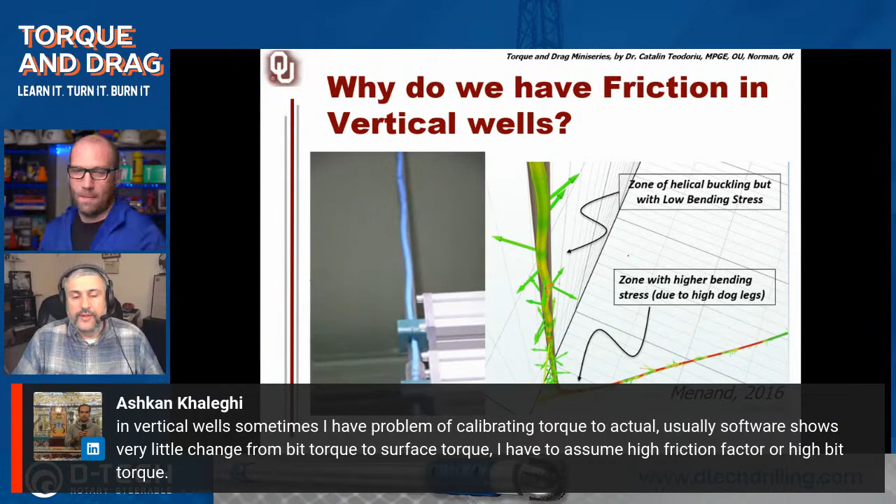There we go. All right. Next question, it's the last: but rolling ones will help drag more, no? I think we're going back to the centralizers there. Well, Florian, I don't think that. You know, the test we've done, but it was not on drill pipes, it was on casing.

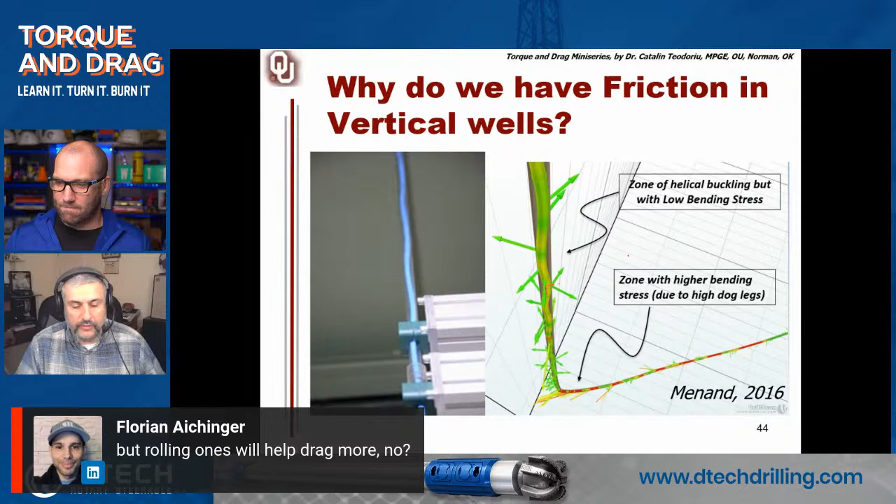But the tests we've done have clearly shown, and we used some data from the field as well, we clearly showed that the rolling centralizers have reduced the friction coefficient from 0.25, 0.26 to about 0.08, 0.09. So it was a very clear reduction. In the laboratory, it was even more. I think in the laboratory, we achieved an equivalent friction coefficient for the system in the range of 0.05. So it was a 5-time reduction of the friction.

So rolling centralizers will do that. Yes, I agree that depending on the direction the rollers are made, you may have rolling centralizers in only one direction, and that may change the drag a little bit, as you mentioned. But there are a lot of modern centralizers that actually have rollers in both directions, and they will significantly improve the friction in the wellbore.